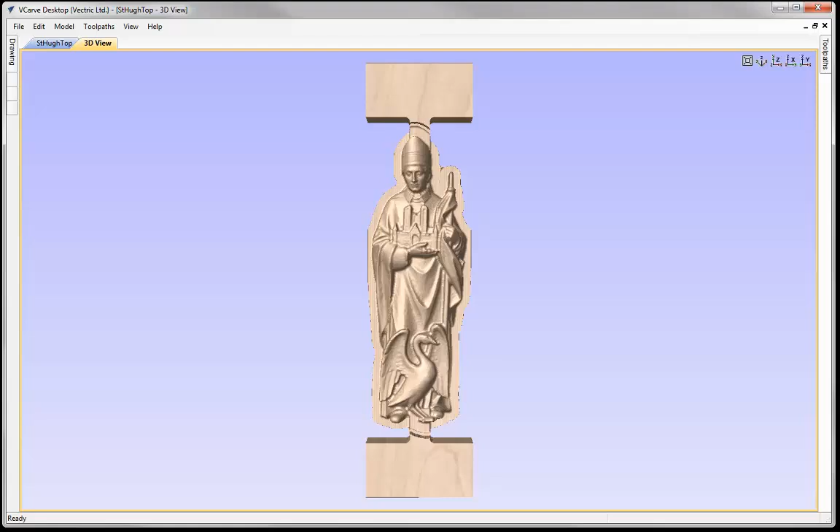So let's just go to File and Close. So let's go and create a new file. So I'm going to start with a width of 3 inches, height of 12 inches and a material thickness of 0.8. Okay, I'm going to set my XY position in the centre, and then we're going to go ahead and press OK. So the first thing that I'm going to do is create my jig.

Now I've already got my block of material. So my block of material is 3 inches wide, 12 inches long, and then it's 1.5 inches deep. Okay, so I need to create a jig that's going to house that. I'm going to create my jig out of just some 0.8 sheet of MDF. And so the first thing I need to do is draw that jig.

So we're going to go and draw a rectangle. Just going to snap to this point here, snap to the bottom area here. So we're doing that around the entire shape of my block of material. So that's the 3 inches by 12 inches. And then we could just close that down.

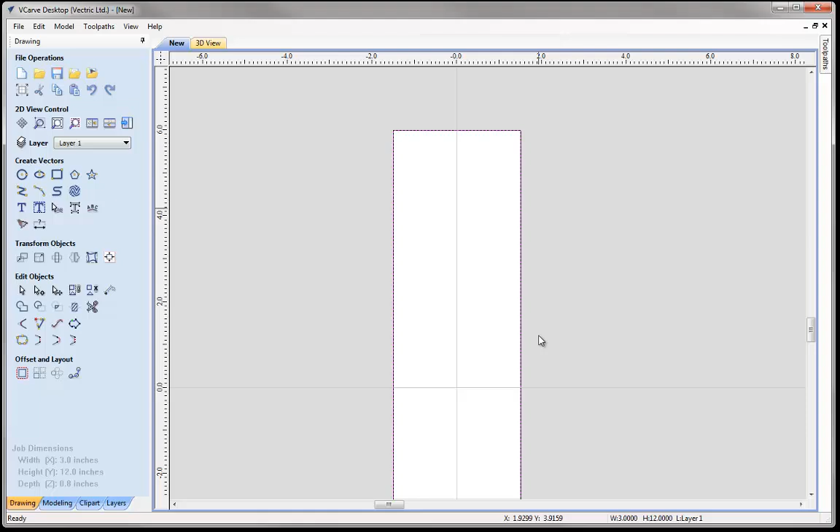Okay, now in order for me to create this pocket, I need my tool to fit around the entire area of the rectangle. So I need to create some fillets, as my 1/4 inch tool is not going to fit into this corner here, and I need to make sure that we have the whole of this rectangular shape pocketed out so we can fit my block of material in there to hold that block in place. So let's go and create some fillets.

So I'm going to use the Create Fillet tool, and I'm going to give that a tool radius of 0.13. Okay, so it's just a little bit bigger than the radius of my 1/4 inch end mill. Okay, we're just going to go dog bone fillets, and I'm just going to apply them to each corner, and we just put that in there and that in there.

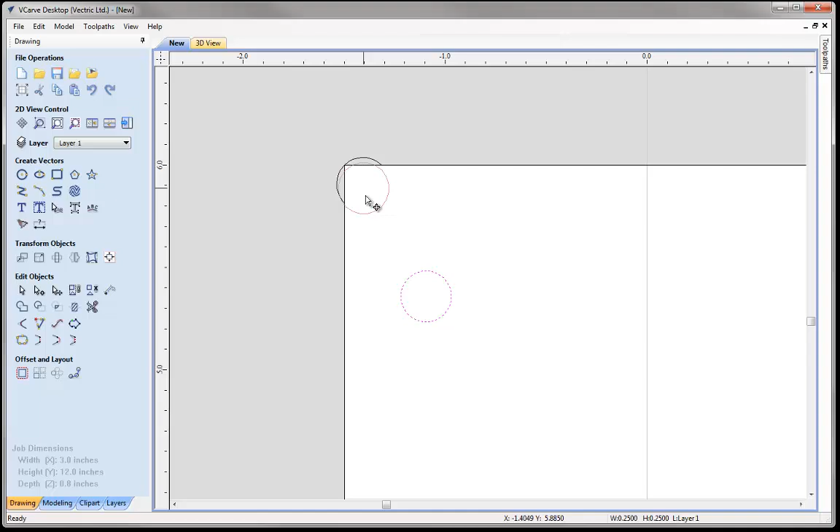And to double check that they fit, I'm going to draw a circle, diameter 1/4 inch, press Create, close that down. Then let's just take that, and then if we just zoom into this area here, we can see that my tool is going to come round and it's going to fit nicely in there so that we get the entire corner of the area that I want to pocket out.

Okay, so we know that's going to fit in there, so let's just delete that circle, and then we'll just use the option here to zoom to fit, and then we'll go over to the Toolpaths tab. So I'm going to set up our material. Now if you plan to actually machine the examples shown in this tutorial, then it's very important that you calculate all the toolpaths using parameters and settings that are safe and appropriate for your particular machine, the tooling that you have available and the material that you are using.

So let's just go and set this up. So we're going to set Z0 off the top of the block. Material thickness we're working with is 0.8. XY position, lower left hand corner. This is going to be my reference point, and this is the key to keeping the whole part aligned every time we flip the part over.

Now because we're working with a part which you'll see shortly when we introduce St. Hugh, we're working with a part that is 3 inches wide, 12 inches long and 1.5 inches thick. So you can see straight away we've got 3 different dimensions. So when we come to cutting the sides of St.

Hugh, we need to create another jig that's going to represent the shape of the side of St. Hugh, and we'll come to that later on when we go to look at St. Hugh itself. Okay, so here, this is our absolute reference point, lower left hand corner here.

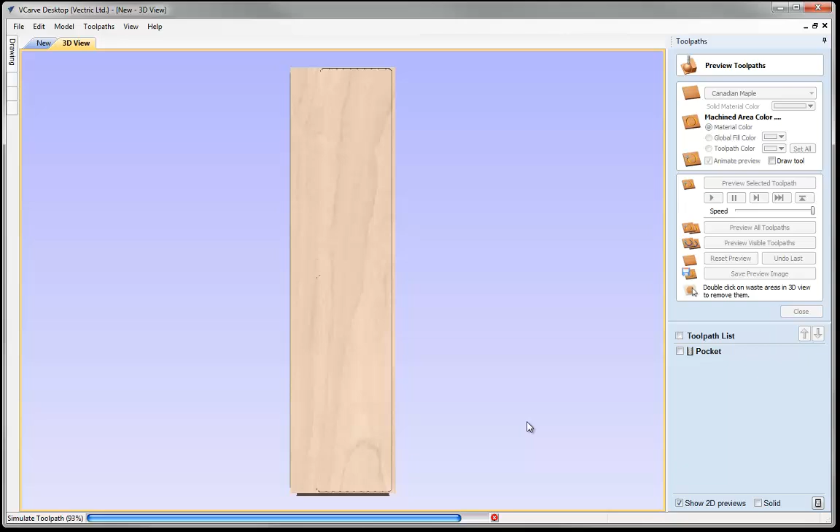Okay, so you can see it's going to do that in 5 passes. I think that was the last pass there, and as I said, you won't really be able to see anything because we're working with the entire job space.

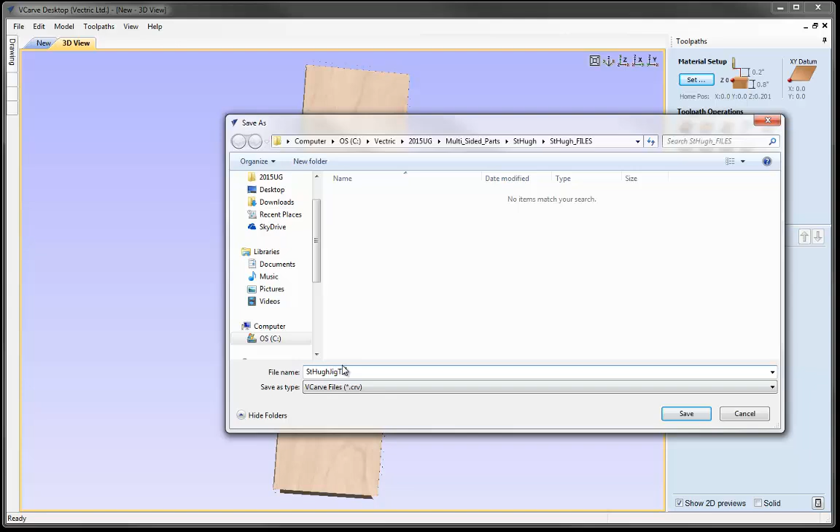Let's close that down. I'm going to save this. I'm going to say File, Save As, and then in the project folder I'm going to call this one St. Hugh Jig Top Bottom. Okay, so this is for the top and the bottom. Press Save and you can access that from the project folder.

Okay, so now I'm just going to work in the same setup. So I'm just going to delete this toolpath here. Delete that one. I'm going to switch back over to the main part, as I'll eventually save this out as the actual model itself. So let's just go and tile our windows here.

Okay, so what I'm also going to do is go back into my job setup and just put that back to the center. This is going to help for when I import the STL model, so I have my XY position in the center there. So then we can press OK.

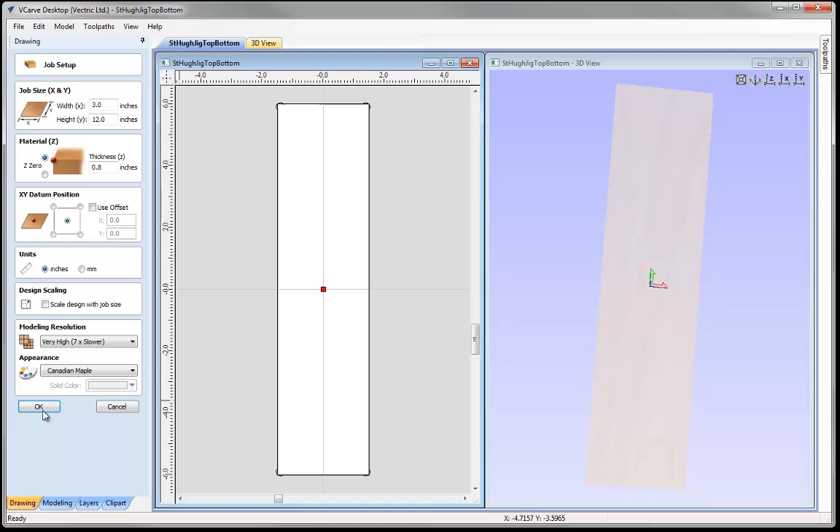And we're going to go into the modeling tab and let's bring that model in. So let's go to import a component or a 3D model, and in the St. Hugh files folder we're going to bring in sthugh.stl.

Okay, so this STL model is courtesy of lincoln3dscans.co.uk. So here we've got our model, so what we need to do is position that within our block of material. So this is the block that we have pre-sized already, so we just need to position him to fit in there nicely. So we're going to start the initial orientation.

I can see it, we can see the back of St. Hugh there, so I'm just going to switch to the bottom. Okay, now he's upside down, so let's just rotate that about the z-axis -180. Okay, now I've got him in the right initial orientation there.

So now we need to think about the size of St. Hugh. Now, as I said, we're working with 12 inches by 3 inches. We're not going to bring St. Hugh up to 12 inches because we've got to remember we want to have some area at the bottom and at the top to have as a contact point within our jig to hold the model in place. And this will make sense as we start to work through some of the toolpath side of things.

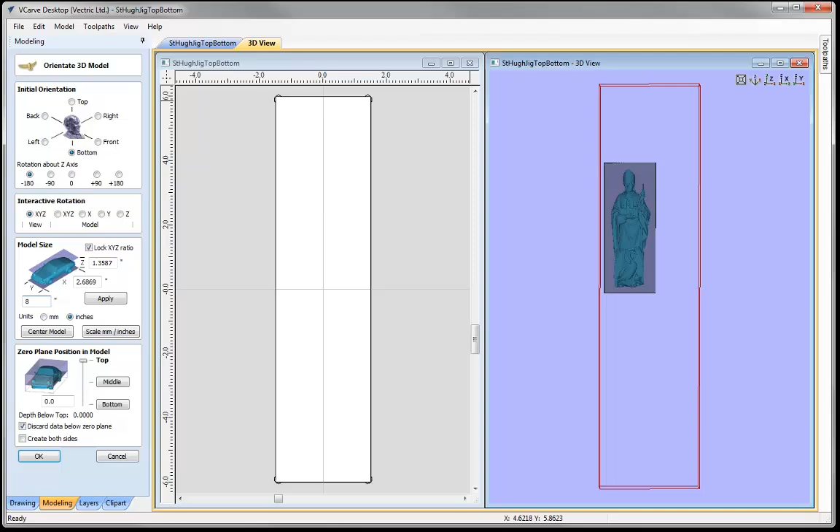So let's just go and give St. Hugh a height of 8 inches. Okay, so you can see if we just apply that to see how that looks. Okay, so that's not too bad. And we can take a look at our x value and our z value.

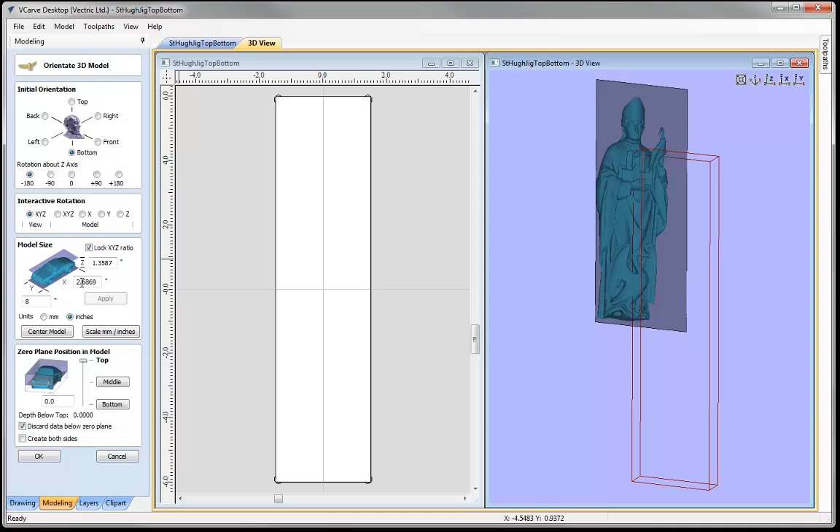Now, our x value is at 2.6869. Now, I could, just to help myself out when it comes to the toolpath side of things, when I set up my material, I might just round this up to 2.7. I'm not going to really distort this a lot because it's such a small amount that I'm rounding up to. So to do that, I'm just going to uncheck lock XYZ ratio. That way I can just alter each one of these values individually without it affecting any of the other values. So let's just change that to 2.7, and then if I just press apply, you can see there wasn't much of a change there, so that's okay.

I'm also going to change the z value and make that 1.4. So I'm rounding that up, so let's just check, see how much difference that makes. I'll make that to 1.4 and then press apply.

Okay, there's not much difference because we're only doing it by very small values. If we just use the option here to center the model, bring that into the center, we can see how he looks. So we've got him at a height of 8 inches, and a width of 2.7.

The reason for that is we are working with a material block that is 12 inches long and 3 inches wide. So that extra 0.3 space surrounding the left and right side of St. Hugh is just so I can go in and remove the material using a pocket toolpath, and you'll see that shortly.

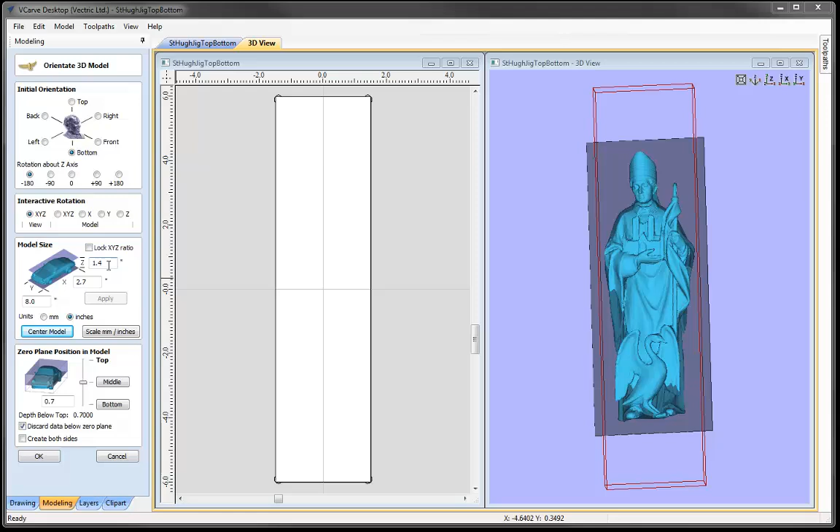So we've got a Z depth of 1.4. Our material thickness is 1.5, and I've put that at 1.4 just so that we have a gap above and a gap below our model so that we avoid any flat spots. That's a gap above of 0.05 and a gap below of another 0.05, and that's the reason for putting the Z value at 1.4.

So we've got that in the centre. We know that's in the centre because we use this centre model option here. And now we move on to the 0 plane position in the model.

Now you can see all the shadow area here is sat below the 0 plane. We want to cut all of St. Hugh out, so we want to push that 0 plane all the way to the bottom so we can get as much of the model as we can in view, so you can see how that will look.

So that's the top of St. Hugh. Let's go ahead and press OK. So let's take a look at him in the 3D view.

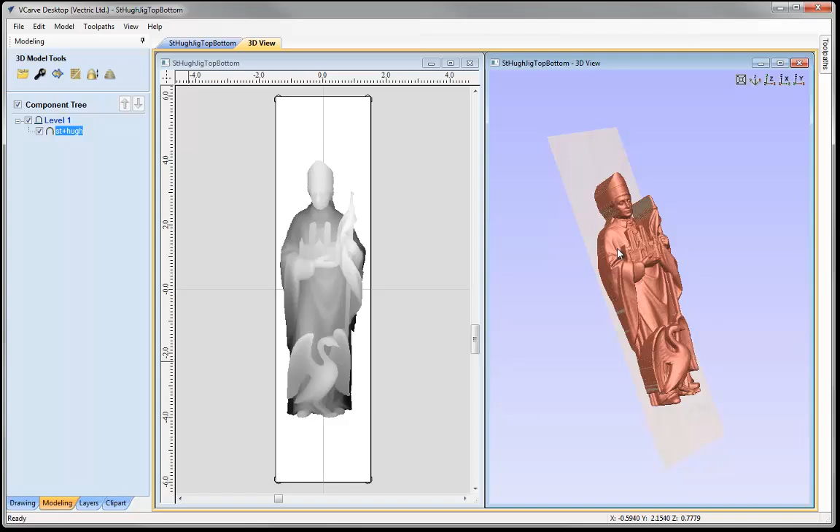So you can see we've got a lot of vertical walls within that model there, and that's just the way the software works. We just work with relief work, that's why we're not getting the underside of St. Hugh. So we've got all of that vertical wall to work with.

So now we need to think about how we're going to hold the model within our block of material. We can't just cut this out, otherwise it'll just fall out. So we need to think of how we're going to hold that in place.

Now if we go into the clip art tab, you can see we've got a folder here called 3D tabs. So you can access that in the project folder. Let's take a look at what we've got - lots of different types of tabs in there. And I'm going to go with the rectangular 0.75.

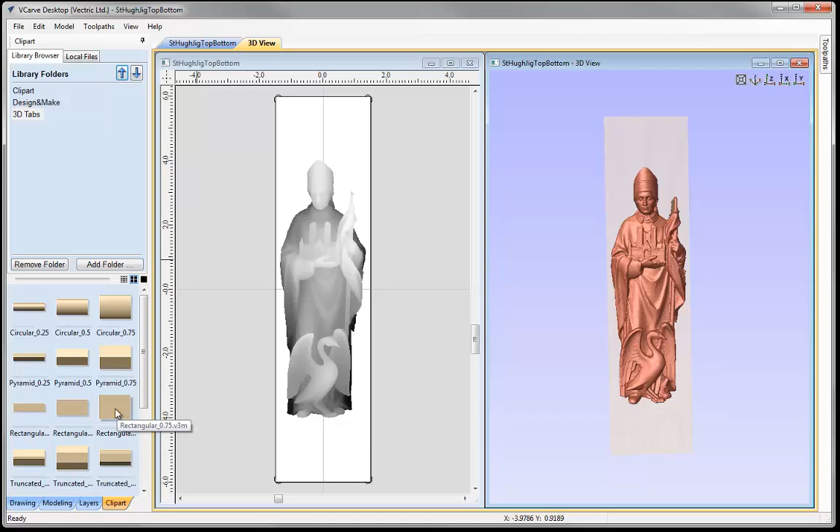I'm just going to double click that to put that in place. So you can see that's in the center there. I'm going to go into the drawing tab and rotate that about its center point, rotate it 90 degrees, and press apply.

Then close that down. And then I'm simply just going to hold down shift with that selected and just drag that up to the top area over here. Okay, just zoom in a little.

You can see it's sort of overhanging St. Hugh, so I'm just going to hold down shift and bring that in a little bit. Something like this shape here, and we'll just pull that up a little bit more. So let's have a look in the 3D view.

Okay, you can see it's a very thin tab. I need to really maximise that. So with that selected, let's go into the modelling tab. I'm going to look at the properties of that. So you can see it's at 0.1106.

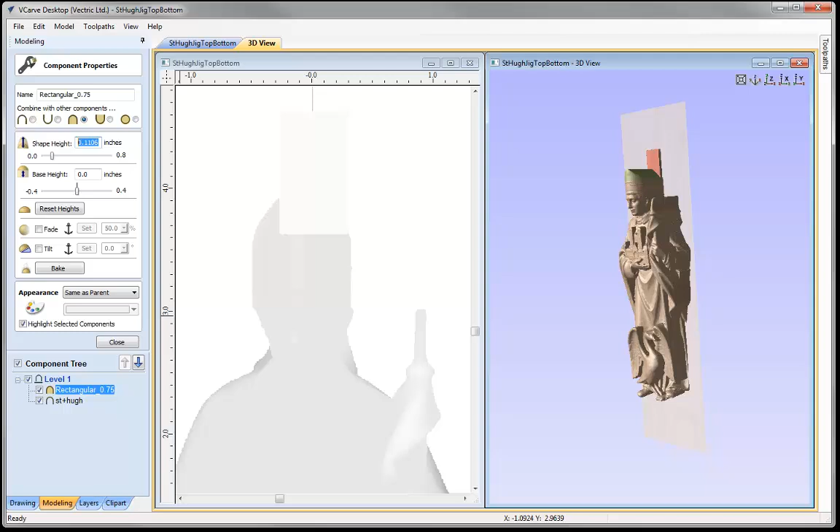I'm going to knock that up to 1 inch, press space to enter that in. We can see that's lifted that up, and so we know we're going to have a tab that's going to be 1 inch thick on the frontal top side of St. Hugh. With that selected, I'm just going to simply create a copy to go at the bottom.

So let's close that down. Select that again, go into the drawing tab. Let's use the mirror option, flip about job center, create a mirrored copy. I'm going to flip vertical and close that down.

Now we can see that this tab at the bottom is a little bit too high for our model, so we need to look at decreasing that one. Let's go in there and just bring that down to say 0.8, and maybe bring that down to 0.7.

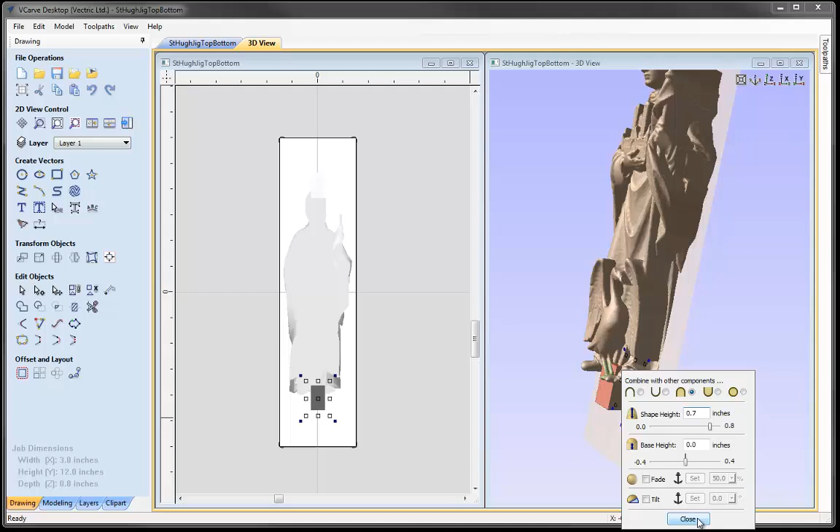Okay, so I'm happy with that. We can close that down. I could even look at hand finishing in this area, but I need to make sure that I have quite a bit of depth in this tab to ensure that my model sits in place. So that's our tabs. Let's put that back in 2D.

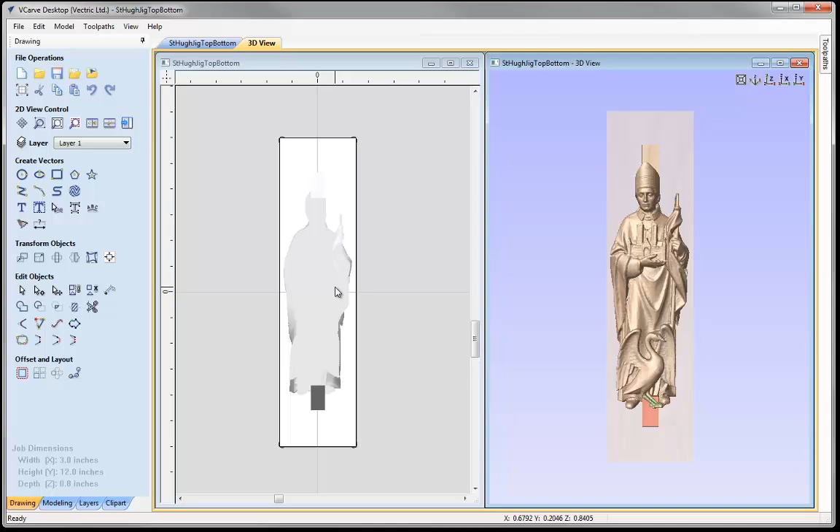Now I need to think about creating some vectors and vector boundaries for us to machine into. The first one we're going to create is the outline of St. Hugh. With that selected, let's go into the modelling tab and use this option to create a vector boundary, and we can see it's created that.

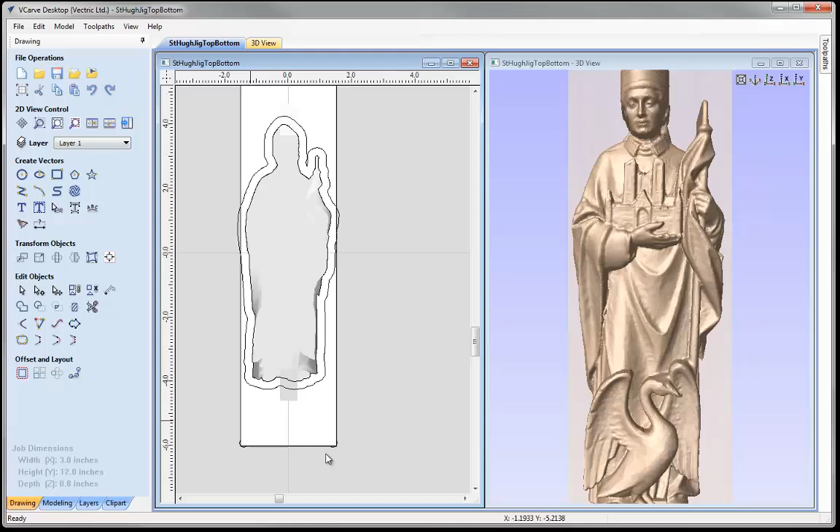I'm then going to take that vector boundary and offset it outwards by a quarter of an inch, press offset, and close that down. The reason for that offset is so that I'd still have some tab in place. I can't just cut directly around St. Hugh, otherwise he'll just fall out of the block of material. So we keep that tab intact with our block of material, contact point at the top, St. Hugh, then the tab, and then the bottom contact point with the block of material.

Let's just put that back in 2D, and then we'll zoom to fit. Now we need to create a shape that represents the area we'll be cutting and the area we won't be cutting. So let's draw a rectangle.

So this is the area that we'll be cutting away, and this part at the top and this part at the bottom is going to be our contact point between the block of material and the model, and this is what will be sat within our pocket shape, so it's going to keep that in place.

So let's think about some more toolpaths that we need to create. We're going to have a block of material, so the first toolpath we really want to create is one that's going to cut away some of the excess material that we don't need, a lot of the side of St. Hugh. So I'm just going to take this tab here, go to the modelling tab, and create a boundary.

I'll do the same for this tab here, create a boundary there. I'm then going to shift-select that vector, shift-select that vector, and move those to a layer, just call that new layer. It's just going to be a temporary layer for now, pocket. Just call it pocket, and then we'll make that not visible, press OK.

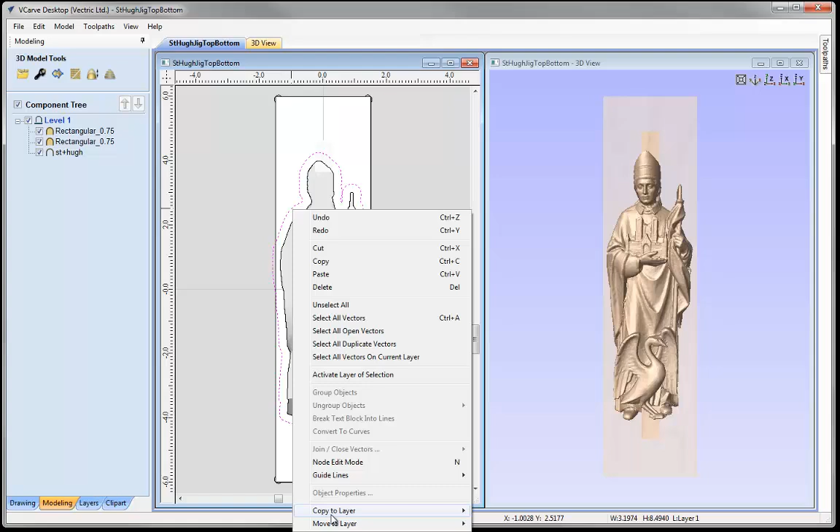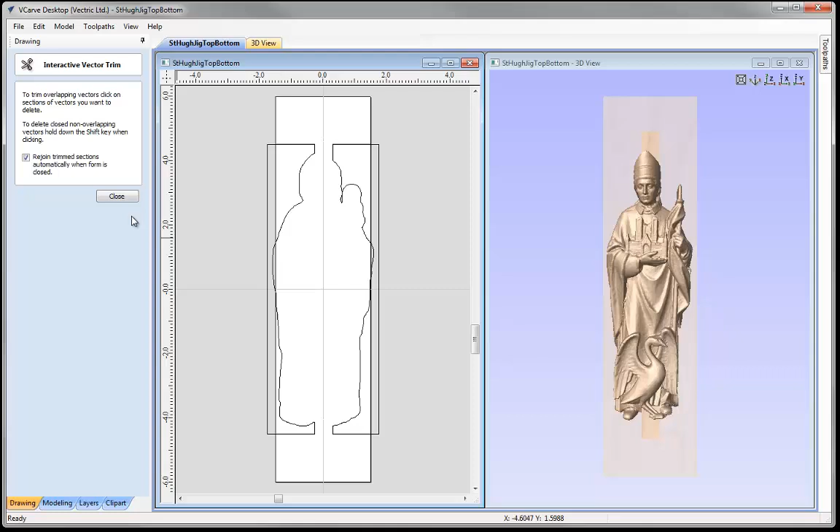I'm going to take this outer vector, right mouse click, and say copy to layer, pocket, and go to our layers tab, switch off layer 1, switch on the pocket, make sure that's the active one, and then I'm simply going to trim away the areas I don't need. So that's everything inside, I take that away, this and this, and I'm left with the outer areas between that rectangle shape and the overall outline of St. Hugh, along with the tabs, because we don't want to cut into the tabbed areas.

So let's take those vectors, right mouse click, say move to layer, layer 1, go to our layers tab, we can delete that layer now, so let's delete it, switch on layer 1, and then we can see we've got all the vectors we need now to go ahead and create some toolpaths. Let's switch over to the toolpaths tab, using that option there.

Now the first thing we need to do is set up our material. We've still got this set up as if we're working with that pocket shape, so we need to change that. Let's go to material setup. Material thickness we're working with is 1.5 inches. We're going to set our XY position in the lower left hand corner.

We must make sure that we do that because that's where we're referencing from this pocket shape. Okay, so this block of material we're going to carve St. Hugh out of is going to sit in this pocket shape here, and we set the XY to be in the lower left hand corner there, so we must make sure that we have that the same in both files.

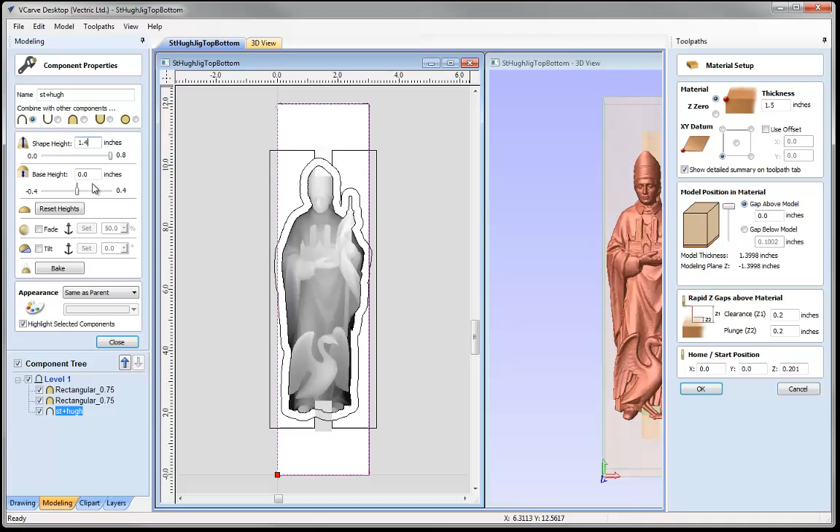Okay, so with that selected there, we then now move on and we can think about the model position in the material. Okay, so we've got a gap above, well, we can see the model thickness is 1.3998. So what I should do really is just quickly go back over to the modelling tab, go into the properties, select St. Hugh, and let's just round that up to 1.4, and then press space to enter that in. We can close that down, and then we could go back over to the toolpaths tab.

So the first toolpath we're going to create is the pocket. We're going to clear the material outside the surrounding area of St. Hugh. And that's just going to make it easier for us when we turn the part over and cut on the back side, and ultimately when we cut the side there won't be any material there. So let's take those vectors. I'm going to select that one, shift and select this vector here. Let's go to the pocket toolpath. Okay, start depth is going to be 0, it's going to be at the top of our block of material, and we're cutting down all the way, so we're going to do that at 1.5 inches.

So at this point it's a good time to make some decisions about the tools you're going to use. In this case I'm going to use a 1/4 inch end mill, so please make sure that your tool would fit down the 1.5 inches in that block of material. So I'm happy to do that, so I'll just go and use that end mill there. And then we could go down. I'm going to do that in a raster motion. I'm going to profile last, and I'm going to do that at a raster angle of 90 degrees. It's going to go up the y-axis. Call that pocket, and then we could go ahead and calculate that.

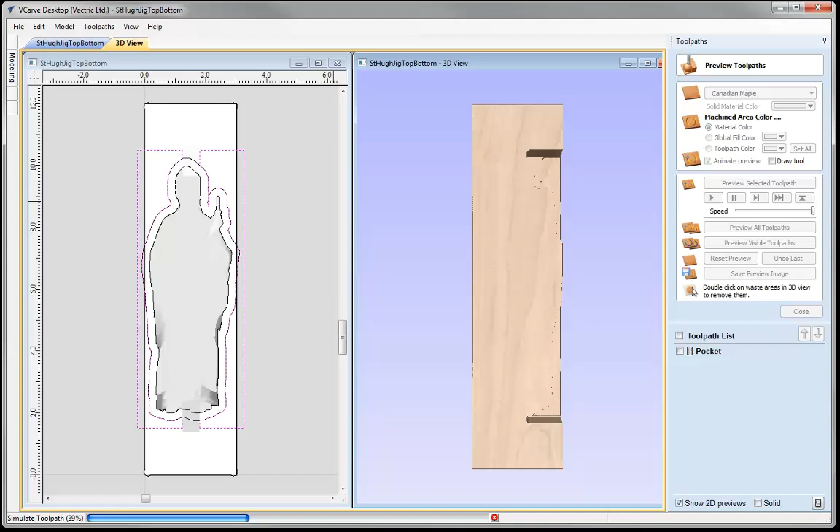Let's just preview that toolpath. You can see it's removing all of the excess material on the right hand side, and then it's going to move on and remove everything on the left hand side. And so you can see straight away that we are left with the top block and the bottom area of our block intact, and this is the area that's going to keep our model in position, and it's going to keep it in line because we've got that sat in our pocket shape that we created.

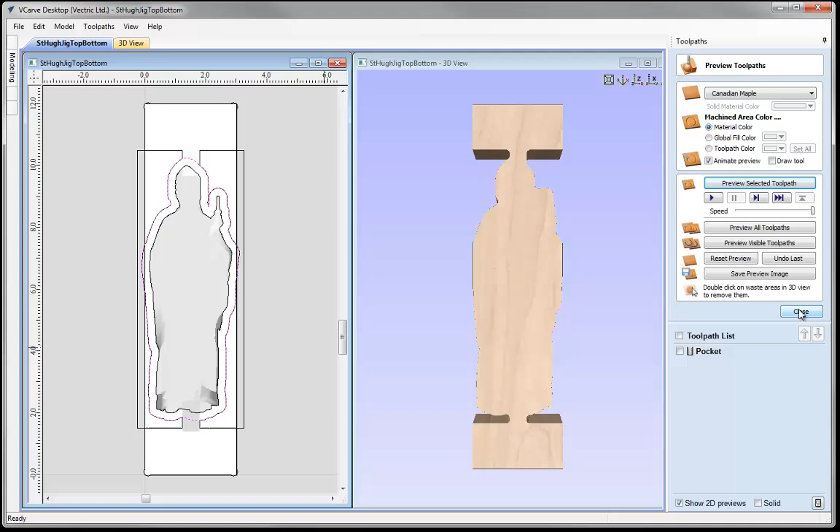So now we can start to think about the 3D toolpath. So let's select the outer vector for St. Hugh there. We'll just close the preview toolpaths option down. And the first toolpath we're going to run is the 3D roughing toolpath. So in here, again, we're going to use a 1/4 inch end mill. I'm going to use the selected vector, so we're not going to have an offset because we've already offset the boundary vector of St. Hugh.

Machine allowance of 0.03, and then what we're going to do is we're going to apply a Z-level raster cut on that. We're going to raster in the Y direction, so it's going to follow the grain of wood. So it's going to go in a Y motion up and down. We're going to call that one 3D roughing, and we'll press calculate there. That's just going to work that out for us.

Okay, so you can see how that will look. So let's just preview that toolpath. You can see it's just chopping away there at the excess material, just so it makes it safer for us to go in with a smaller tool to finish off St. Hugh. Okay, so that's not too bad.

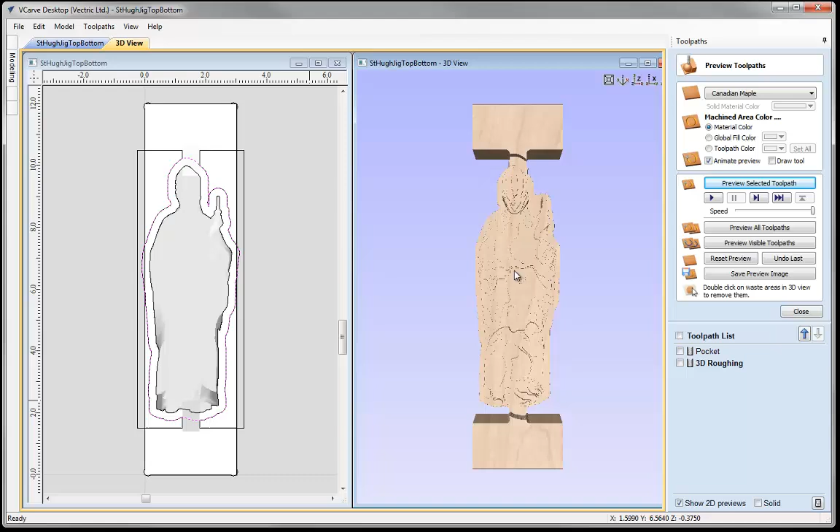That's okay. What I think I could do with though is going over St. Hugh with another roughing toolpath. So let's go back in there with the roughing toolpath, and this time we're going to do the 3D raster option. So I'm going to raster that along Y again, just to try and get rid of some more material there. But this is going to follow the shape of our 3D model. So let's just go ahead and call that 3D roughing 2. Press calculate, and this is going to take a while to calculate those toolpaths.

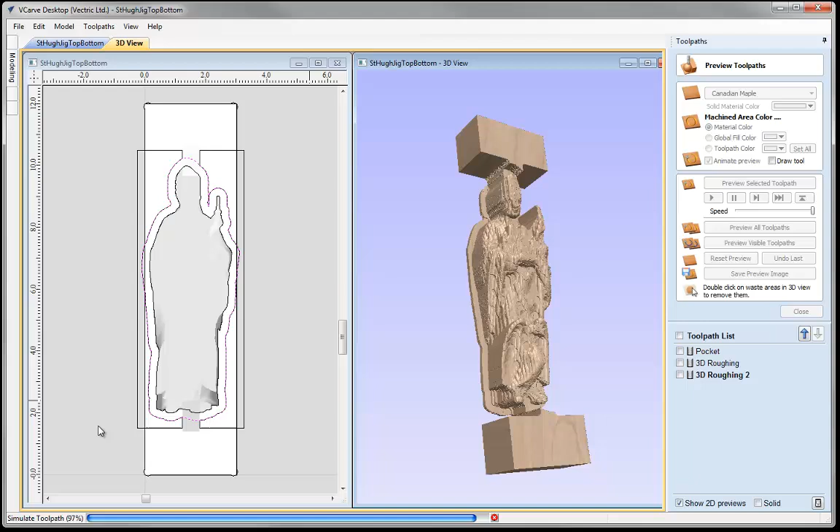Okay, so you can see that there, so let's just go ahead and preview that toolpath. We can see it's going in sort of the Y axis there, and you can see it's taking away a lot of material. We're getting something that resembles the model a little bit more than what we had earlier. Okay, so it's taking a while to do that. This toolpath has a little bit more work to do. Okay, and so you can see how that looks. So you can see now when we go in with a smaller tool, it's going to be a lot easier for us to cut away to get the detail.

So let's close that down, and then with that vector selected, let's go and run a finish toolpath. Okay, in this case we're going to use an 1/8 inch ball nose. Now again, please be wary of the tools that you use and ensure that you have the correct length, as we're going to cut pretty much all the way through. So ultimately the bottom area is going to be at 1.45 inches. Okay, so we're just leaving that 0.05 at the bottom there as the gap below. So you want to make sure that your tool is safe to use in this case.

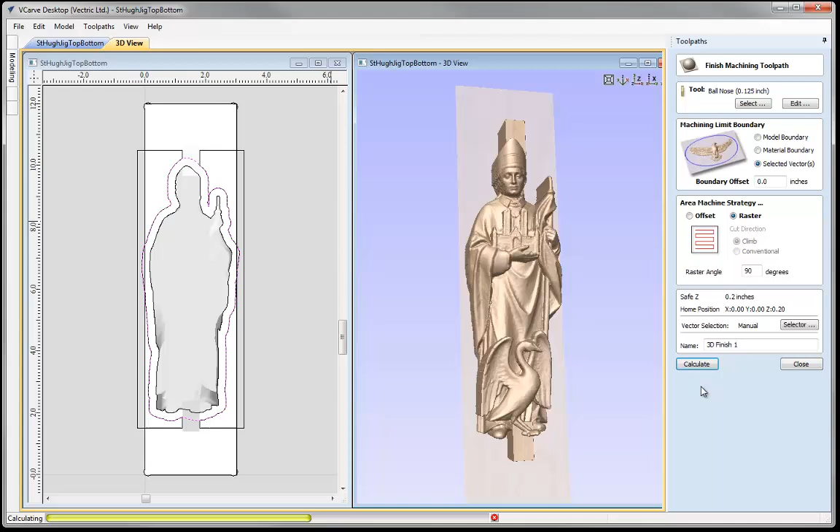So again, I'm going to use the 1/8 inch ball nose. I'm going to use that selected vector with no offset. I'm going to raster that, and again, let's just do that at 90 degrees so it travels in the Y direction. And then we could call that 3D finish. We'll press calculate. It's going to take a moment to work that out. There's a lot more detail here for the software to calculate.

Okay, so you can see how that would look. Let's just preview that. Okay, so you can see we've got this sort of halo area, and that's the 0.05 gap below that we've left on there. So that's what that is. Okay, so you can see the detail looks okay, so I'm happy with that. So we could go ahead and close that down. Okay, so at this point, we just go back into the preview there. This is what we'll be left with.

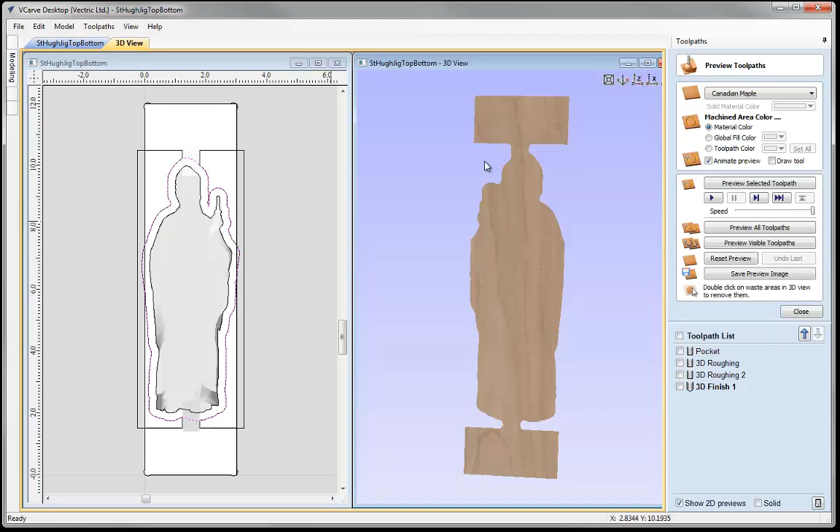And so this is where we need to turn our block of material over. So we can turn that over 180 degrees, and then we need to calculate the back side of St. Hugh. So let's just go and save this file. So go to File, Save As, and we're going to save this one as St. Hugh Top. Okay, so just change that name there. So St. Hugh Top, save that. And then we could go and start to create the bottom side of St. Hugh. So let's just close that down, and then we'll just close this session down.

I'm going to go and create a new file. So again, exactly the same dimensions, 3 by 12, Z0 on the top. Okay, we're going to make that 1.5. Just to set this up, we're going to set our XY position in the center, working with very high modeling resolution, and then we could go ahead and press OK. So let's go and import St. Hugh. So let's go to the Modeling tab. We're going to import a component or a 3D model, St.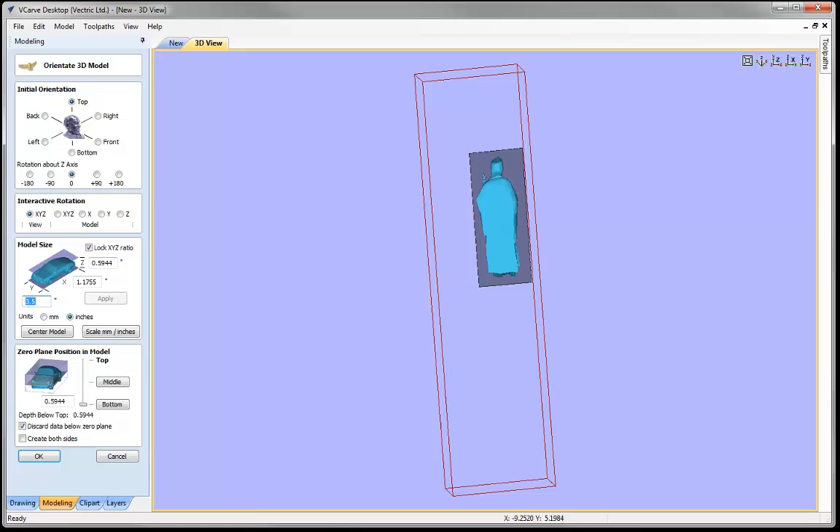Hugh STL, press open. Okay, so we've got the back in view, so now I just need to alter the size. So again, I'm going to make Y 8, press apply, then we're going to uncheck lock XYZ, we're going to round this one up to 2.7, I'm going to round that one up to 1.4, press apply. I'm going to make that in the centre, and then we're going to push that 0 plane all the way down to the bottom, then we can go ahead and press OK. So let's just go to view there, I'm just going to go and tile our windows vertically. First thing we need to do is create a vector boundary, so we're going to do that by pressing that option there.

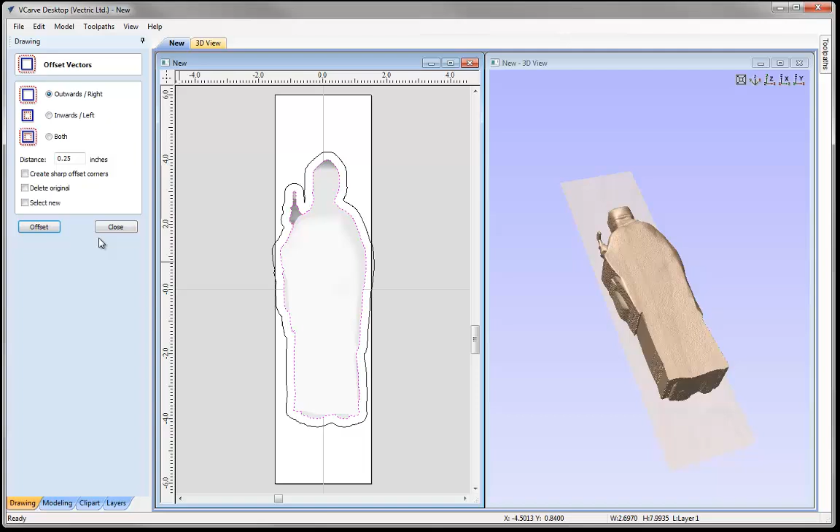We're going to the drawing tab, we want to create that offset, so with that vector selected, let's go to offset, outwards, 1/4 of an inch, exactly the same as we set it up before, press offset and then we can close that down. Okay, so now I need to put my tabs in.

Now I want to make sure my tabs are in the same position as we had on the front side. So what I could simply do is just bring up the file we worked with earlier, so here's the top. I'm going to take this tab, shift and select this tab, and while I'm here I'm also going to select these vectors here. This is purely just to double check the alignment to ensure that when we turn St. Hugh over on the top side, so we've got the bottom side ready to cut, that everything lines up with the top and the bottom.

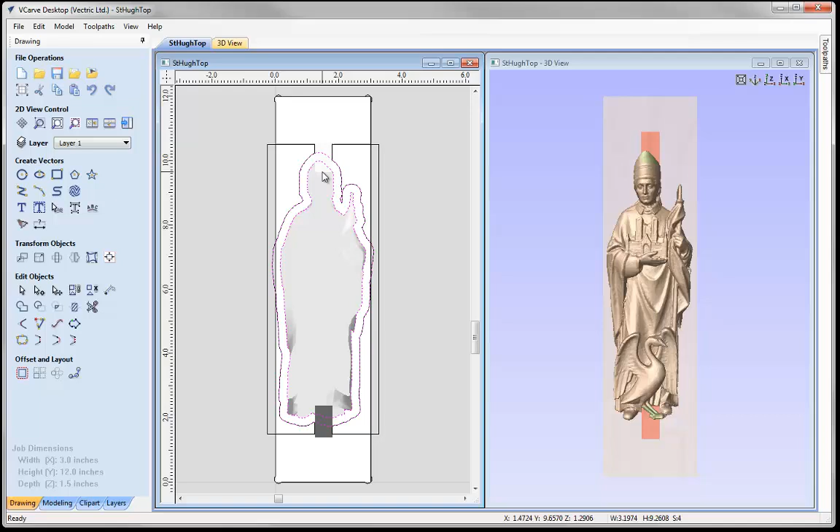So I'm just going to take those, right mouse click, press copy, and then if we just go back into the back side, I'm just going to right mouse click, press paste. Okay, so you can see it's brought that in a different position, and that's because in the other file we ultimately set the XY to be in the lower left hand corner, and this is set up to be in the centre at the moment.

That's okay. So I'm just going to take everything that we've just pasted in there, and press F9 on the keyboard. That's going to bring that into the centre, and then I'm going to use the mirror selected objects option. We do not want to create a mirrored copy, so I'm going to uncheck that, but I'm going to make sure we have flip about job centre, and that's important because we have everything set up in the centre when we import that STL model.

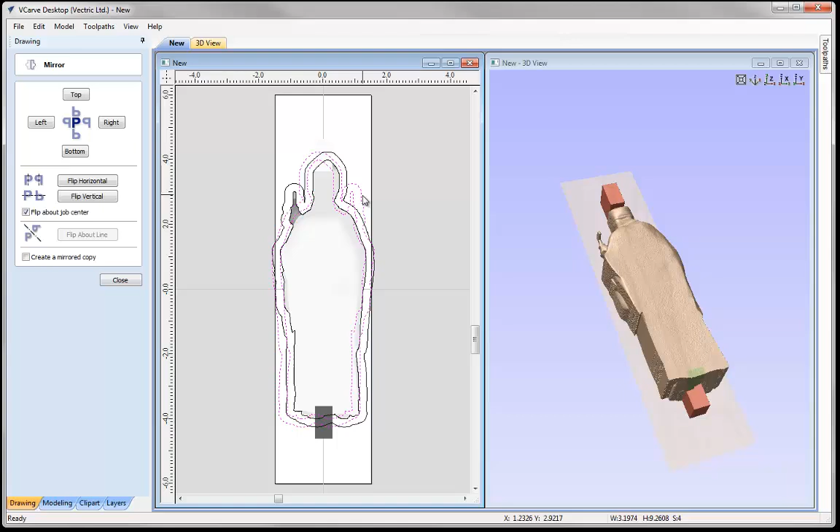So we're going to do that about the centre, and I'm just going to use the option to flip horizontal. Let's do that, and we can see that that is perfectly lined up, so I'm happy with what we've got there. So let's just close that down, deselect the tabs like so, and then delete those vectors that we just pasted in there. Okay, so we've got our outer vector, the boundary vector, and our tabs in the exact position that they'd be in when we turn the part over.

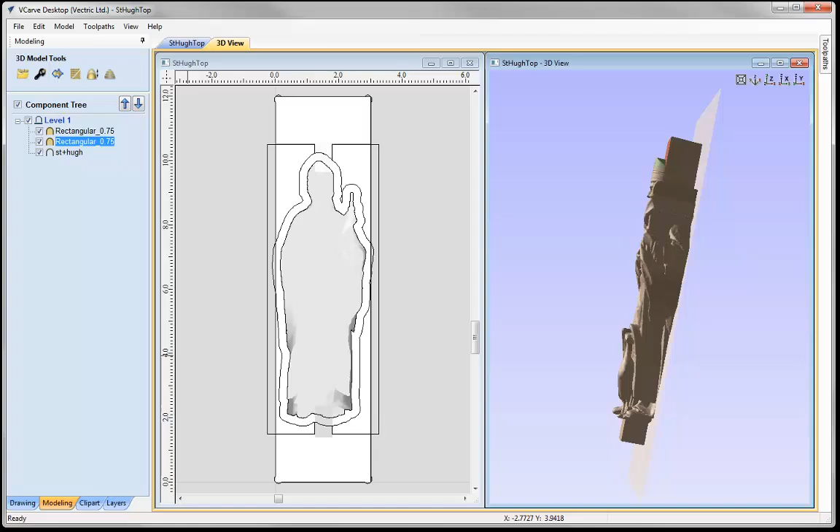So the next thing we need to do is think about the heights of our tabs. We want to make sure that we don't cut away our tabs altogether. So let's just think about the bottom side here. This is the easiest side to think about. Now, when we created the top side, if we just open that file, here's the top, we know that the tab is going to be at the bottom here. So we want to make sure that our tab is going to come up almost to the top of our model. We want to bring that right up to the area just before the cloak, not higher than that, just below the cloak area here.

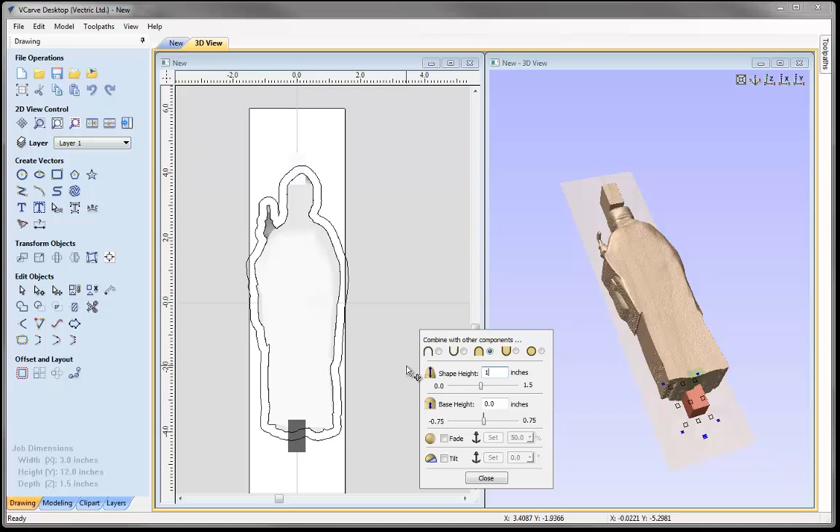So what we could do is just alter that in here. Let's select that little rectangle, and make that say 1.4, then press space to enter that in. Okay, so it's a little bit too big, so let's just make that 1.3. You can see that's just sat nicely underneath there. So we know that we're going to have tab still intact there. So I'm just going to leave that as it is. Let's think about this one.

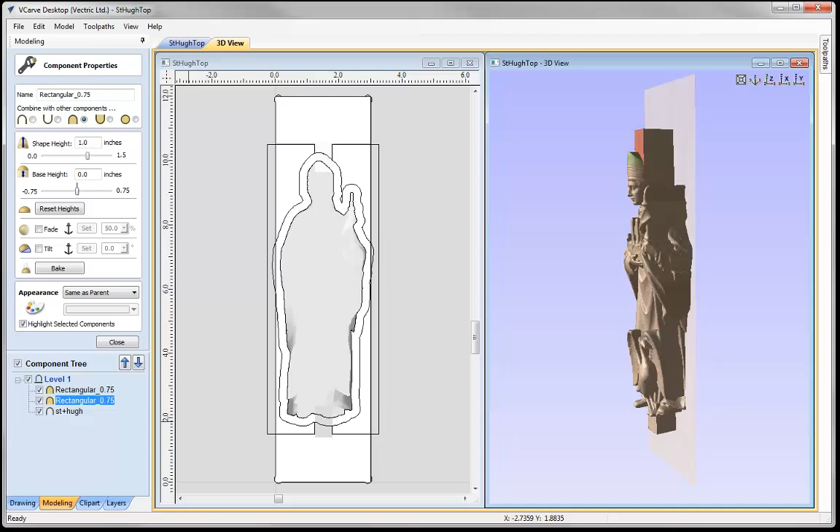Now if we go into the original file, the front side, the top tab that we've got here, if we just go to the properties, we know it's 1 inch. So we can see that it starts around here, and the end just goes to the bottom of the plane here. So we don't want to cut too much away, so let's just open up the back side. You can see that it's currently at 1 inch, and that's what it was for the top side. So I'm going to set the shape height of this to be say 0.85, just to ensure that I have quite a bit of material left in there for when we cut that out.

Okay, so you can see that there. So you can see it's going to come into the top of my model, but that's okay. I can look at hand finishing that myself. So let's just close that down, put that back in Z, and now we're ready to go and run some toolpaths. So let's switch over to the Toolpaths tab.

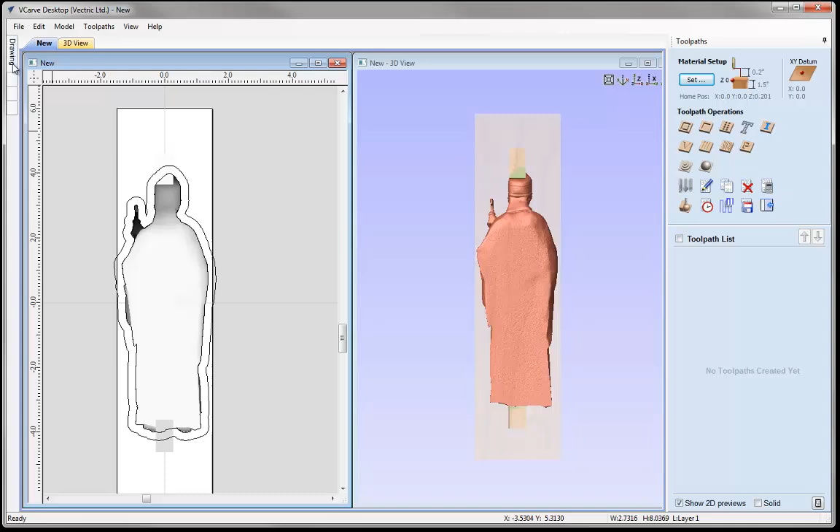Well, first, before we do that, let's just take our model and just double check the height of that. Okay, let's just round that up to 1.4, press space to enter that in, and then we can close that down. Okay, I'm just going to unpin the drawing tab there. So we're going to take this outer vector here. Remember, we've already cut away the material from the top side with that pocket, so we don't need to worry about creating another pocket on this toolpath.

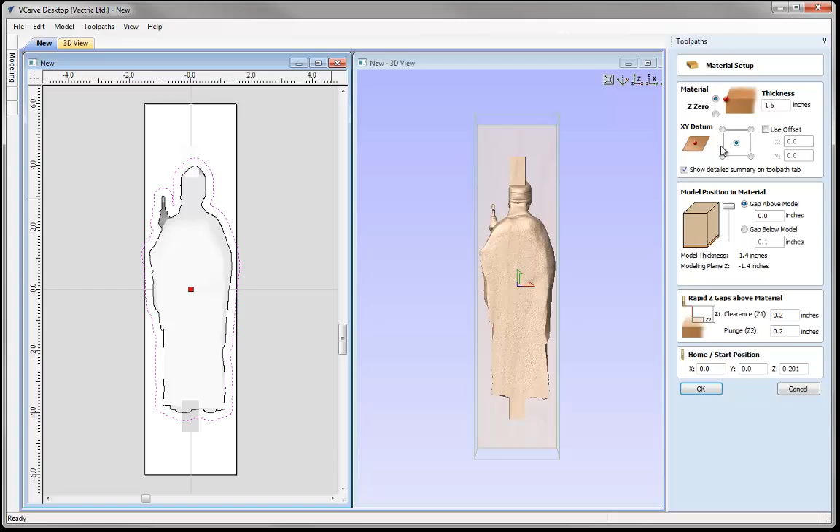So the first thing we need to do is set up our material. Okay, we're setting our Z0 top of the block, material thickness we're working with is 1.5. XY position, we want that in the lower left hand corner. We are referencing from the same point from the top side of St. Hugh and from our jig that this block of material is sat within. Okay, so make sure that's in the lower left. We're going to have a gap above 0.05, so remember we left that 0.05 on the top and on the bottom there, and then we could just go ahead and press OK.

So with that vector selected, let's go ahead and run our first toolpath. So again, we're going to do 3D roughing toolpath, the same toolpath that we did for the top. So we're going to do a Z-level raster strategy. Okay, we're going to use a selected vector, no offset. We're going to raster in the Y direction. I'm going to call that 3D roughing, and let's press calculate. Software is just going to work that out for us. Let's just preview that. We can see how that looks.

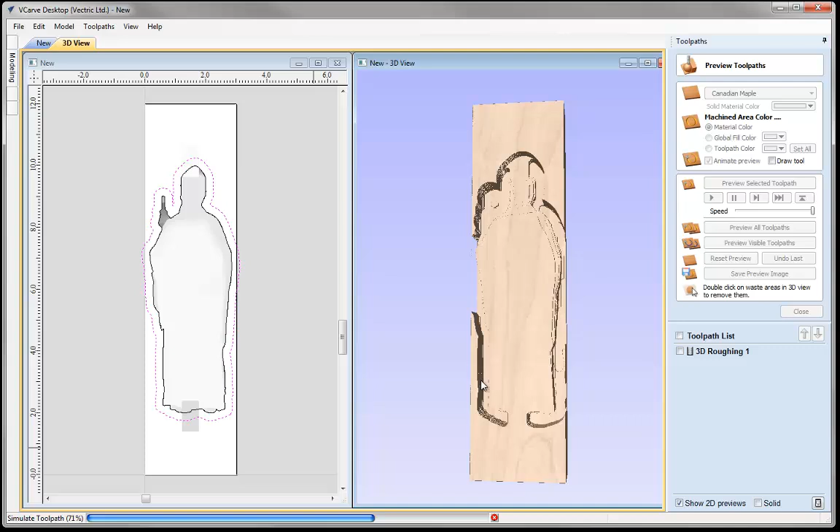Now, as I said, remember this material here will not actually be there because we've already cut that away. And this is just one of the limitations to the software in that we can't preview more than one side at a time. So we have to always remember that and think about how the part looks on the front side, and now that we're creating the back, how they will match up. Okay, so I'm happy with that.

Let's close that down. We're going to do another 3D roughing toolpath. This time we're going to do a 3D raster along Y, press calculate. And again, software is just going to take a moment to work that out for us. And then let's just preview that toolpath. Okay, it's just taking a while to work out. It's a lot of information to put through there. And there we have that part. Okay, so let's just close that down.

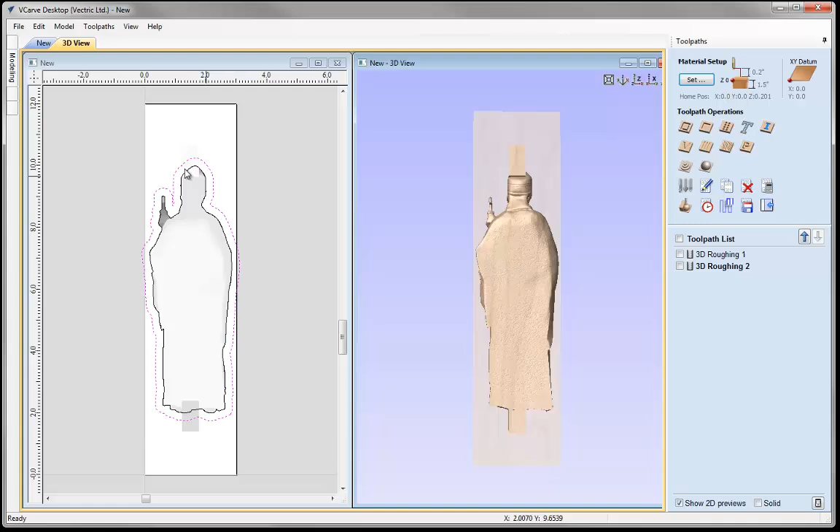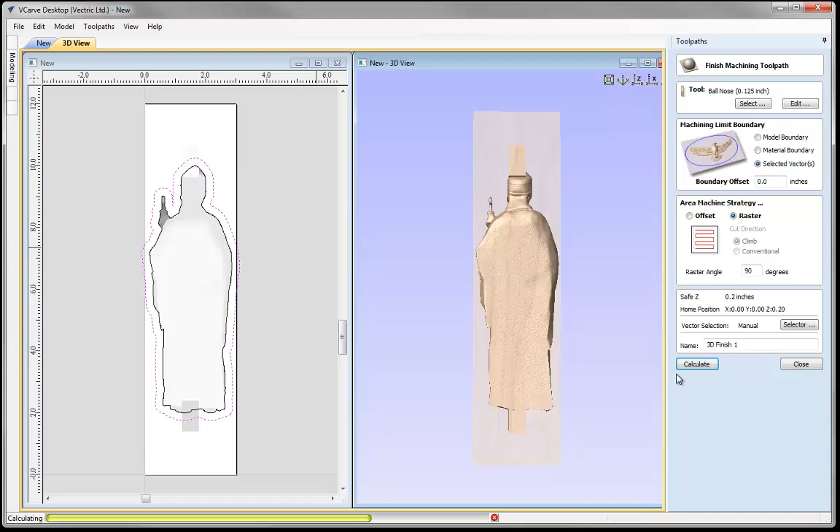With that vector still selected, let's run a 3D finishing toolpath. I'm going to use an 1/8 inch ball nose in this case. Use a selected vector. I'm going to do that in raster strategy. I'm going to do that 90 degrees, so it's going in the Y axis. Let's press calculate. The software is just going to work that out for us. And then we could go ahead and preview that toolpath, see how that looks. Okay, so I'm happy with that. That's brilliant. So let's just close that down.

So at this stage we'll go ahead and save this file. So let's go to File, Save As. We're going to call this one St. Hugh, and this time we're going to call this one Bottom. And then we'll press Save. And now we've got our top and we've got our bottom. So now I need to think about the sides of St. Hugh. So we're looking at the side, the right and the left. So let's just go and close this down. So go to File, Close, and we're going to go and create a new file.

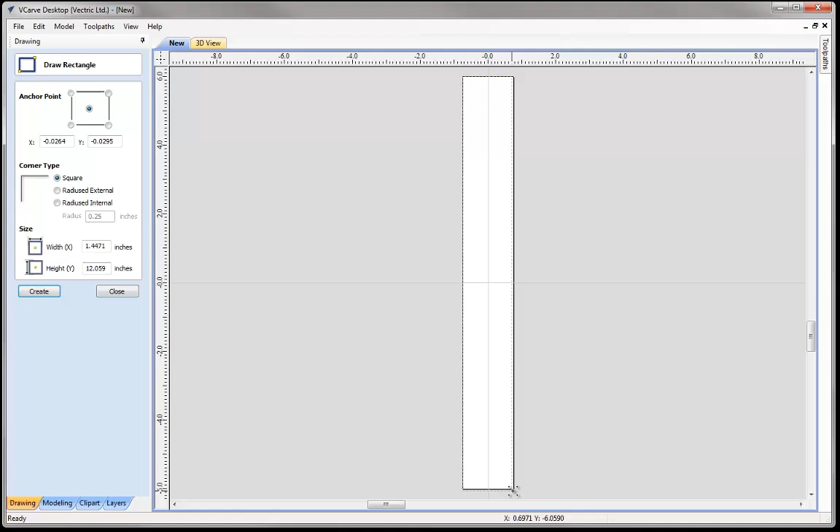Now when we're turning that block of material on its side, we need to swap the width and the thickness dimensions. So now the width is going to be 1.5 and the material thickness we're working with is going to be 3 inches. So we could go ahead and press OK. And so again, our first point of call is creating that jig. We need to make sure that we've got a jig in place that's going to hold the side of our material block. So again, let's go and draw a rectangle. I'm going to snap to the top corner, snap to the bottom corner. You see that's 12 by 1.5.

That's what we just set our job position to be. So with that vector selected, let's just go and create some fillets. So again, we're going to use 0.13 radius there. So let's just go and attach those to each of the corners. Then we'll just put that in there, close that down.

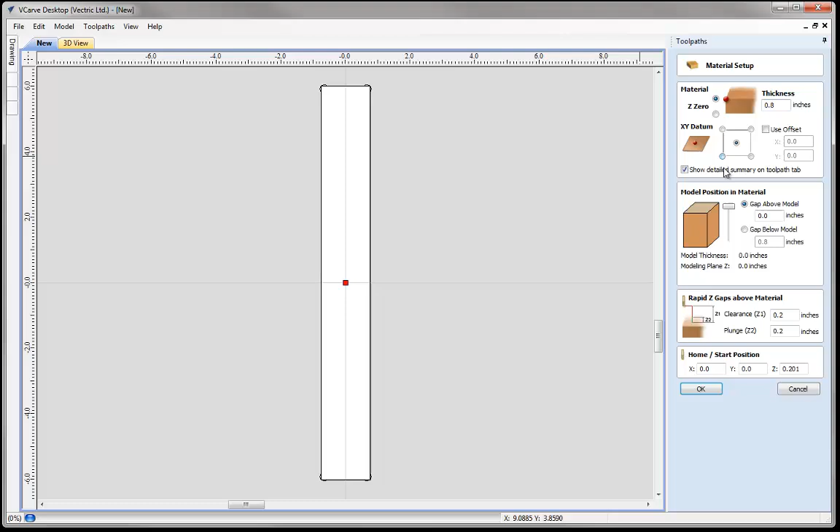So what I really need to do is go to the Toolpaths tab. Okay, we need to set up our material. Okay, now I've actually set this up as if we were working with a material block. What I should have done is set this to our piece of MDF. So we're going to put that material thickness down to 0.8. I'm going to go in the lower left hand corner, so this is our point where we're going to reference from, and then we could go ahead and press OK.

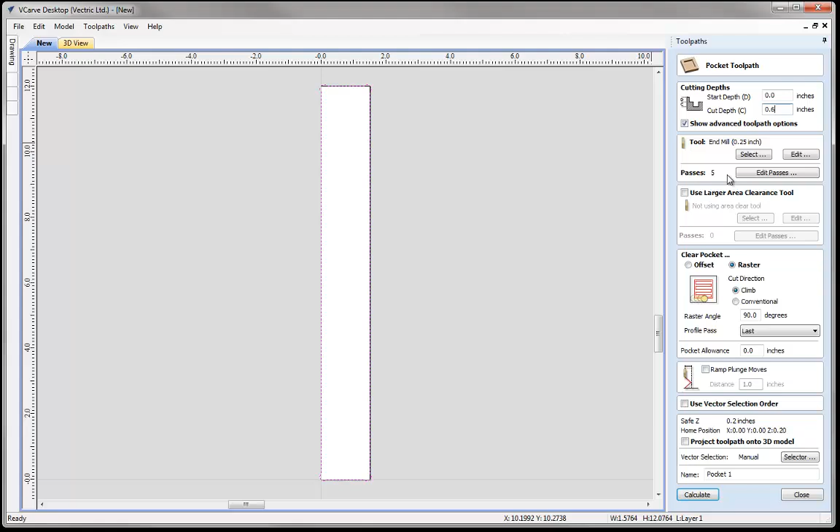And then we're just going to go and run a pocket toolpath. So let's select that vector, run a pocket. I'm going to cut down 0.6 in this case, use a 1/4 inch end mill. You can see it's going to do that in 5 passes. Just going to raster that. We'll press calculate, and then we could preview that, but we're not going to see anything, so I'm not going to preview in this case. But we've got our toolpath there, so we'll go and output that to our CNC machine.

So now that we've got our jig or our pocket in place to hold the side of our block of material down, we now need to think about getting the side of St. Hugh in. So let's just save this file. So we're going to go File, Save As. We're going to call this one St. Hugh Jig, and I'm just going to change the top and bottom there to sides. And then we could go ahead and press Save. And then we're just going to go to File, Close.

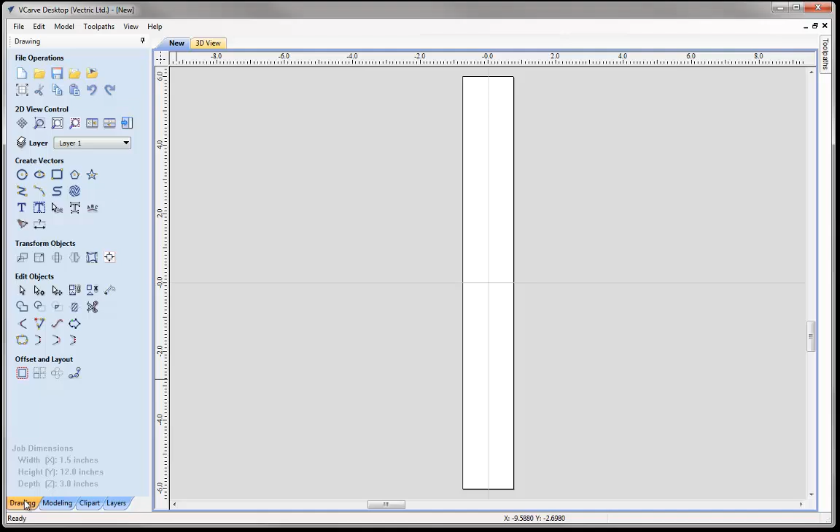I'm going to create a new file. Okay, so again, 1.5 by 12 by 3 inches. Again, I'm just going to make sure that's in the centre for now, just for positioning my model. And then we could go ahead and press OK. So let's go into the modelling tab, and we're just going to go and import a model, and import St. Hugh, and press open. This time we want to do a side, so we're just going to pick either right or the left. We need to do both anyway, so we'll just go to right in this case.

And then again, we need to alter the model size. So here, this is always going to be the same. It's going to be 8. Let's press apply. And we'll just centre that just to put that in position so you can see how that looks. And then we're just going to unlock XY, and we're going to change the Z to 2.7. We're going to change X to be 1.4. Press apply, centre that to make sure it's in the centre. And we're going to push the 0 plane all the way down to the bottom. And we're going to go ahead and press OK.

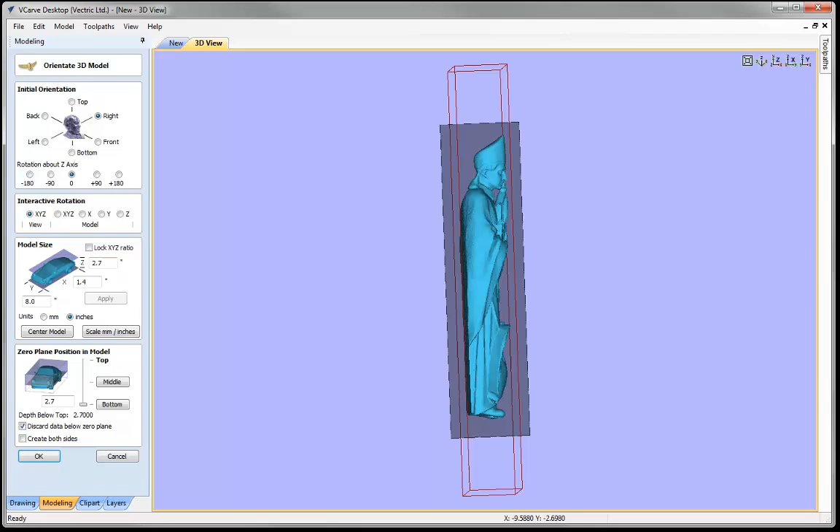Okay, so here we have this side view of St. Hugh. Okay, so he's now 2.7 inches high. So now we need to create the vectors for our toolpath. So let's just tile our windows. Let's go to View, and we're going to go Tile Windows vertically. With that component selected, let's just create a boundary. Okay, so you can see we've got that vector there. Let's go into the Drawing tab, and again we're going to go ahead and draw in the offset. So I'm going to offset that outwards by 1/4 inch.

And I'm also going to create my rectangle in this case. This is just going to be the area just for visual reference of where the ends of my material block are. So in here we're going to go with a height of 9 inches, and then we're going to go with a width of say 2 inches, and we're just going to go ahead and press create. Okay, so you can see that there, and then we could just close that down.

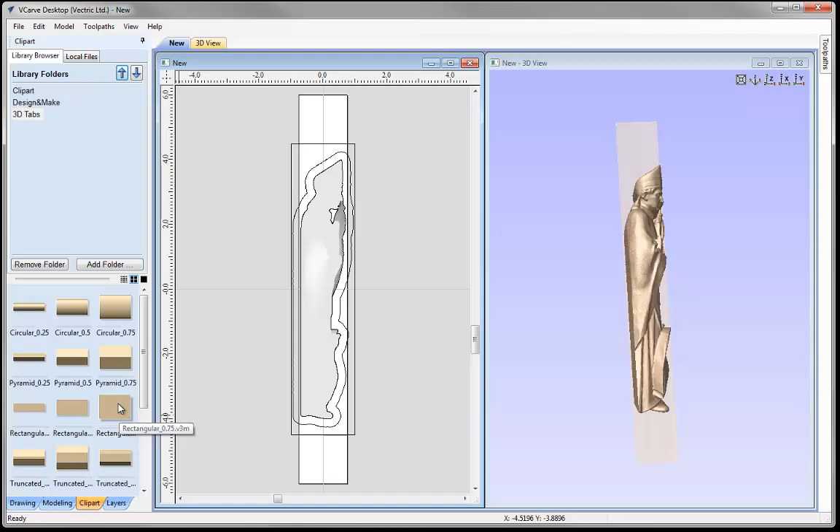Now I need to put some tabs in, so let's just go to my clip art tab. I'm just going to import the same size tabs, rectangular 0.75, double click just to put that in. Okay, let's double click that, there we go. Let's go into the Drawing tab with that component selected. Let's just rotate that about its centre point by 90 degrees and press apply. We can close that down. And then I'm just going to shift that up to the top, so keeping that in the centre there.

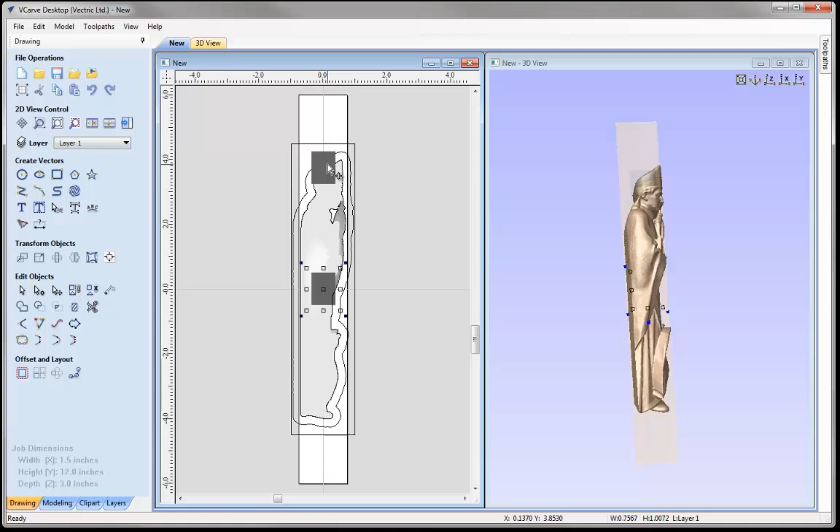So I'm going to shift that up to the top there, and then just bring that across. This is just to ensure that I'm getting the whole area of where the tab is in place there.

With that tab selected, let's go and apply some height to that. So let's go to the Modelling tab, go to Component Properties, and bring this all the way up to say 2.5. You can see that's way over there, so I'm going to make that 2 inches, and maybe bring it a little bit down, make that 1.5. Make that 1.8. This is just to ensure that I'm not going to cut into that tab.

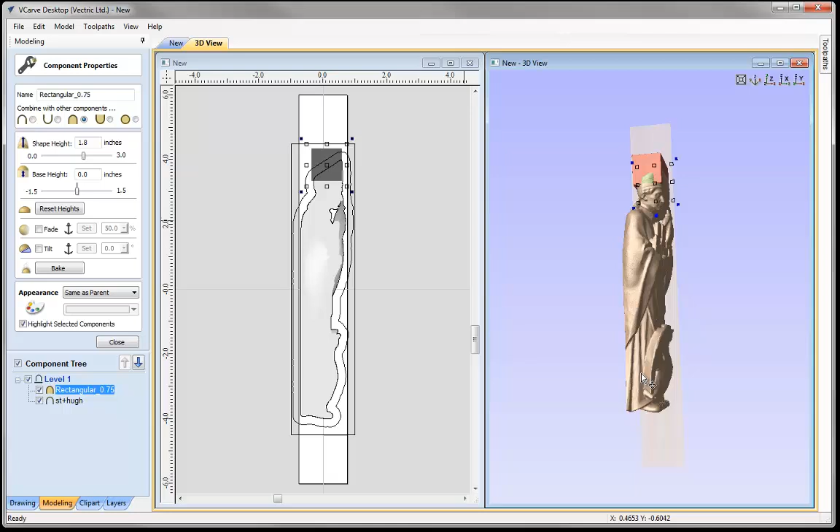Now we've already pretty much cut into the side of St. Hugh from when we did the top side, so it's not really too much to worry about what we're going to cut into on the top here, as we would have really cut the majority of this. All we're really thinking about is cutting into the areas that we couldn't get to on the top side, for instance behind this wing area here. So now we can cut into that. So that's that one.

Let's take that, and then create a copy on the bottom there. So if that component's selected, let's go to the drawing tab, and use the option to mirror selected objects. Let's use the option to create a mirrored copy, flip vertical. You can see it's created one at the bottom there. So then what we need to do is just position this.

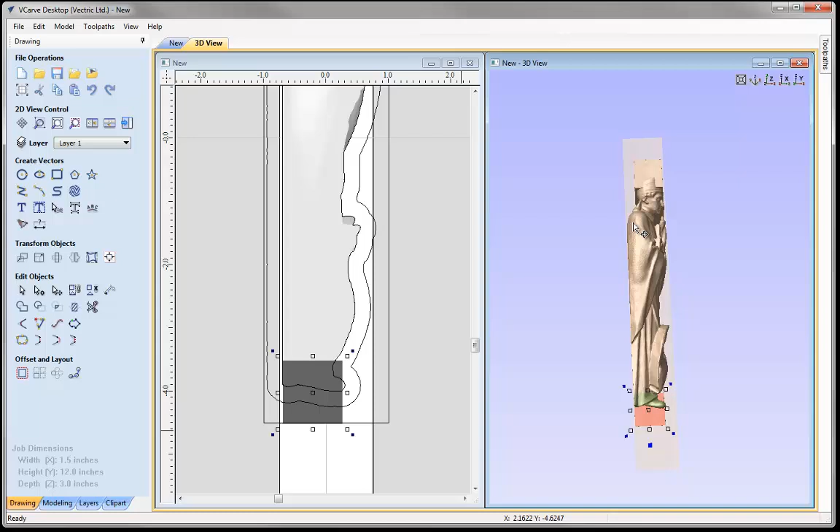Now we know that tab at the bottom is positioned flush with the back of St. Hugh. So we're just going to put that roughly in position there, and I'm happy with the height of that as well. Again, we're not really going to be cutting into a lot of the detail here because we've already cut into it.

Now, the next thing we need to think about before we go and create toolpaths is the depth of our part. Because we've turned it on its side, we've now increased the amount of depth we're working with. So we're now working with a part that's 2.7 inches deep. Now that's quite deep for regular tools to get down into, so we need to think about how we can overcome this issue.

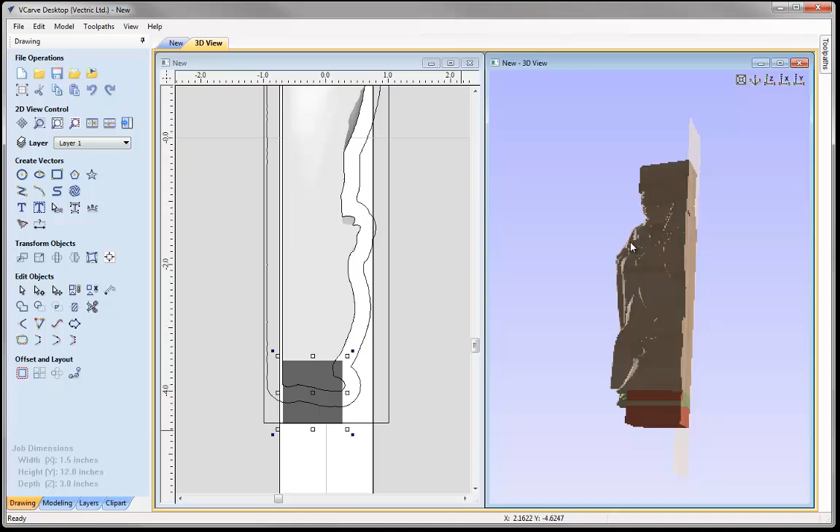Now what we're going to do here is actually add in a modelling plane, a zero plane. We're going to push that halfway, so we're only going to work with half of the model, and then cut that half, 1.5 of this side. When we come to do the other side, we'll do the same again, add that zero plane in at 1.5 inches, at the halfway point, and look at machining the other 1.5 on the other side. This is just a safety measure here.

So let's go to the modelling tab, this model option up here. We're going to use the add zero plane option, and then go into the modelling tab, go into the zero plane, right mouse click, go to the properties. First we want to set that to merge, and then make the base height 1.5, press space to enter that in. We can see that that's now 1.5 inches high, so we're only just cutting sort of half of the model here. I'm happy with that, so let's close that down.

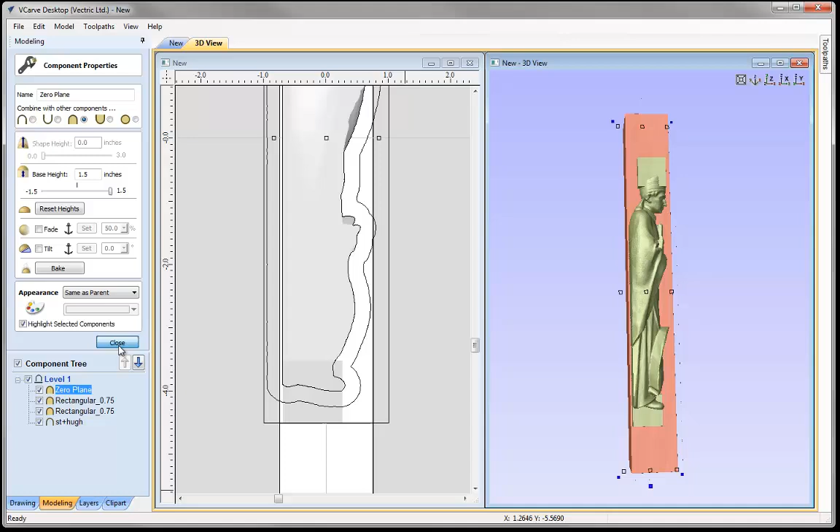So now we're ready to go and create some toolpaths. Let's go into the drawing tab, switch over to our toolpaths tab. I'm just going to press F in the 2D view just to fit that, and then we need to set up our material. So let's go to the material setup.

First thing we need to do is check all of the options in here. Material thickness we're working with is 3 inches. XY position, we want that in the lower left. The lower left is where we're referencing our jig from, and so once we've cut that jig out and then cut this part, it's all going to be referenced from the same XY position so that we keep that part aligned, and that's very, very important.

Gap above the model, let's just make that halfway. We can see my model thickness is at 2.6998. So let's go back over to the modelling tab. I'm going to go to St. Hugh, go to the properties, round that up to 2.7, press space to enter that in. And we'll just undraw the modelling tab there. And then update that, make that 0.15 above and below. Not that it really makes a difference because we don't actually have anything there. And then we could go ahead and press OK.

The whole reason we are doing that is just to keep everything within the center of our block of material, and that will help us keep everything aligned. So let's go ahead and press OK there.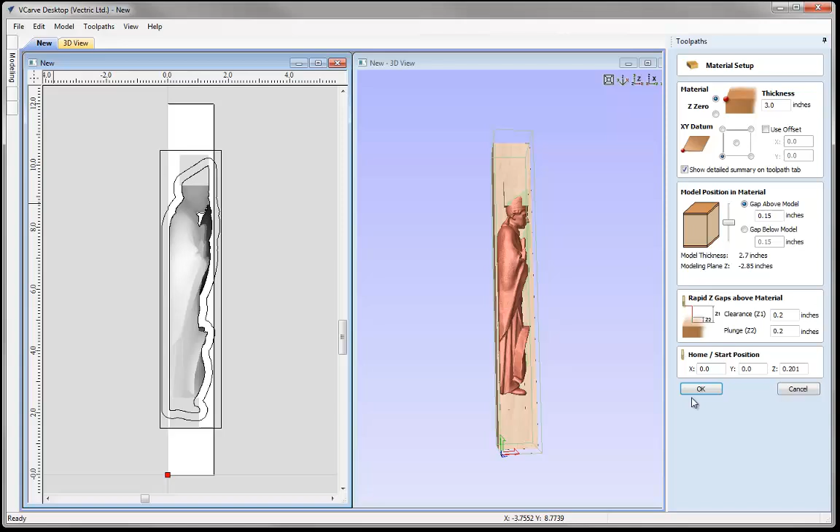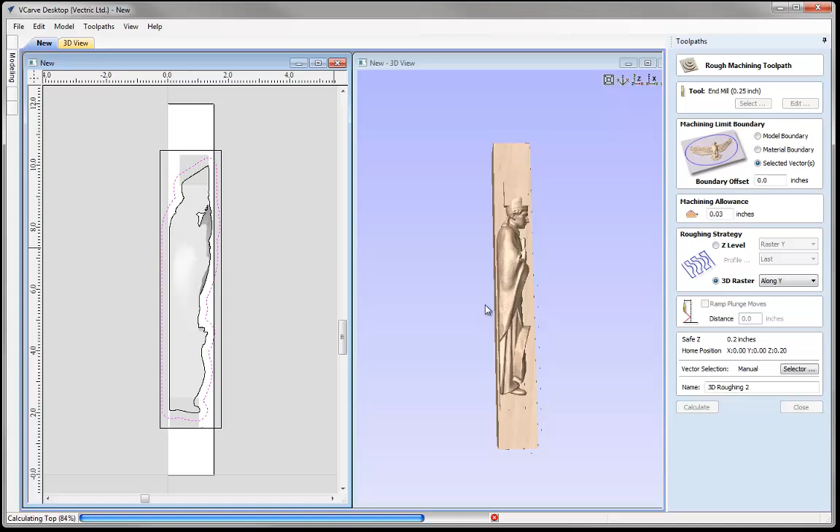I'm going to take that outer vector. This time I'm only going to run one roughing toolpath, a 3D raster along Y, and then press calculate. Now this would have already cut the majority of the material out when we did our top and bottom passes, so all we're doing here is getting into the detail we can't do, like behind that wing, which would be classed as an undercut when we cut that on the top side. So we're just getting into all the little details we can't reach when we run the top or bottom toolpaths.

You can see the software is creating a little simulation of how that will look. And again, you've got to remember that a majority of this material that's cutting away will not actually be there because we would have already cut that away. So when we run this, it will probably do a little bit of air cutting because it's cutting away at material that isn't there.

You can see it's just taking a while to create that. There's a lot of detail there for it to work out what needs to be cut.

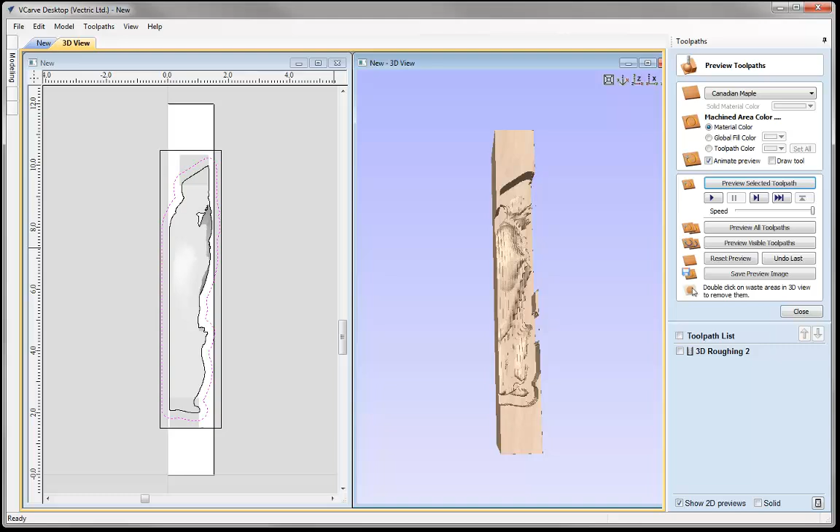And so you can see we've got the finished part there. Let's close that down, and then we're just going to run a 3D finish toolpath. So what we could actually do is just use this, the actual boundary vector, as we've already cut away everything outside there. So we're just going to use that one, go to the 3D finish. We're not going to offset that because we've already cut that away. We're just looking at going into the details in this case.

I'm going to do a raster. Let's make that 90 degrees so it travels up in the Y axis. Press calculate - the software's just going to take a minute to work that out for us. And we can see that there, so let's just preview that, see how that looks.

And that's the finished side. So we're going to get some nice detail in areas such as behind the wing here, and in some details on the side, like the creases of the sleeve here. So that's the side done.

So now we can move on and think about the other side. This is where we take our block of material and we're going to flip that over into our jig, and we're going to cut the other side.

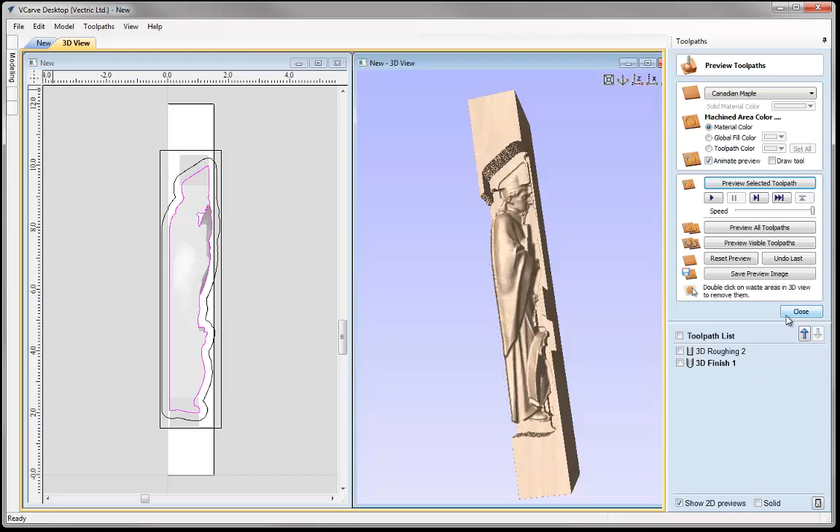So let's just go ahead and save this out. We'll close that down. We're going to go to File, Save As. We're going to call this one St. Hugh, and we'll call this one Left, and then press Save. Okay, so that's his.

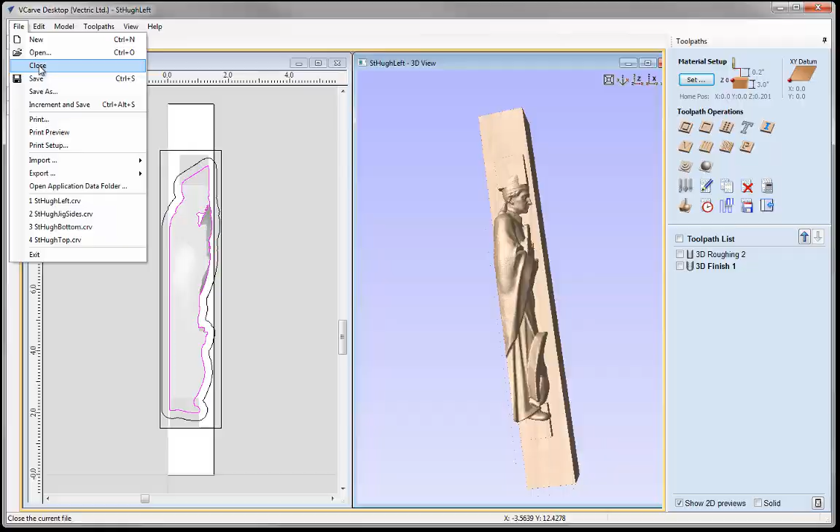If we're looking at it, that's his - that's the left-hand side. And so let's just go to File, Close, and then we're going to create a new file. We're just going to look at creating the other side this time. Exactly the same setup. I'm going to go ahead and press OK. Go to the Modeling tab. Let's import St. Hugh for the final time. Press Open.

This time, if we're looking at it, we're looking at the right-hand side here, so I'm going to use the left option. Okay, so we've got that side in view. Let's just alter these - we're going to make that 8. Uncheck lock XYZ, make that 2.7, we're going to make the X 1.4, press apply, center the model, pull that 0 plane all the way down to the bottom there, press OK, there we have it.

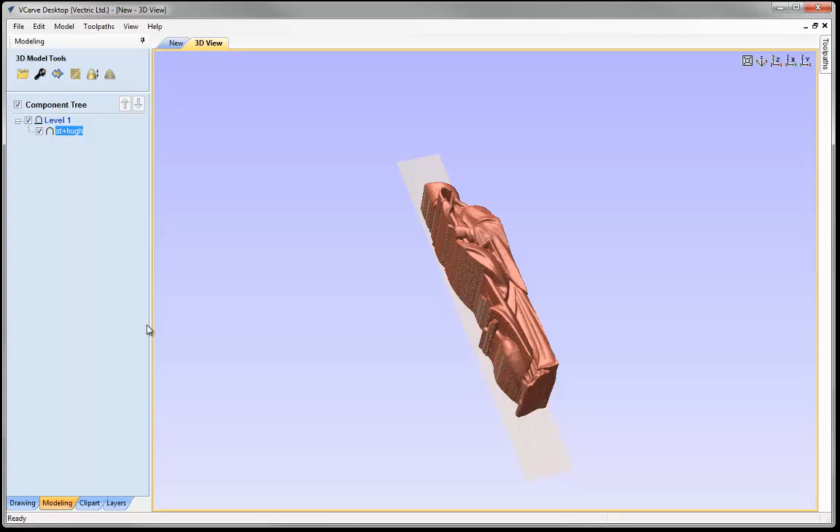And so the next thing we need to do is create vector boundaries and bring those tabs in. I could do that just by going into the file we were just in, so the other side here, and just for now I'm just going to make the XY in the center there just so we get everything aligned. Okay, I'm just going to ignore this message.

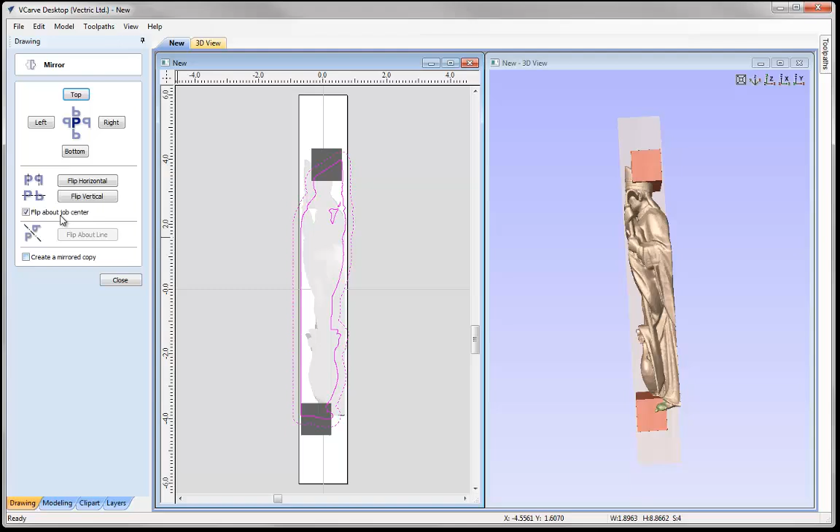I'm not going to save this file out, I just want to take the vectors and the tabs from this file. So I'll right mouse click, say copy, and go into our session here. Let's go into the drawing tab, tile our windows, right mouse click, paste, and use the mirror option. I'll flip that horizontally, and now everything's perfectly aligned, so I'm happy with that. We can close that down.

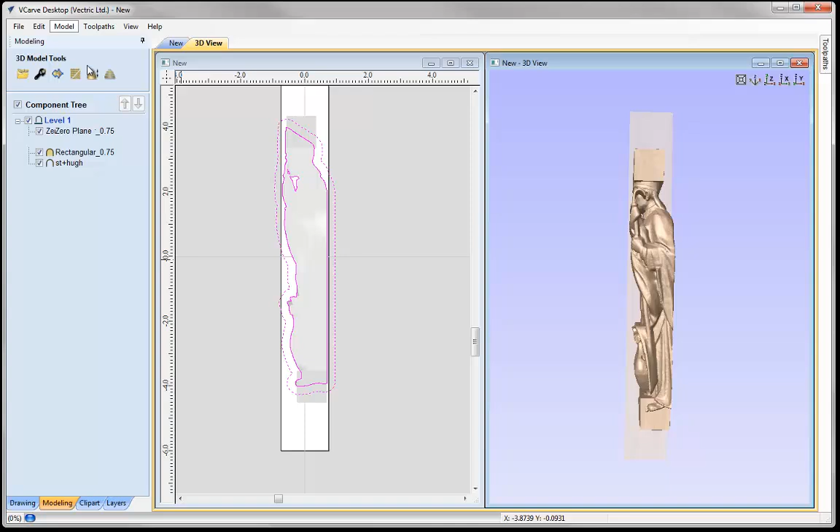I'm just going to leave the tabs as they are, and then we need to add in that zero plane. Let's go to the Modeling tab, go to Model, add zero plane, properties of that zero plane, set that to merge so it blends into St. Hugh, and make that 0.75, space to enter that in. We can close that down.

Just go into St. Hugh there, double check the height, put that to 2.7 and close that down, and we're now ready to create some toolpaths.

Let's go to the Toolpaths tab, so again let's set up our material. Important thing to do here: material thickness 3 inch, XY, we want that in the lower left. We are referencing from where we cut out our pocket shape to ensure correct alignment. Model position in material, we'll have a gap above of 0.15, just to make sure our model is dead on in the centre of our block of material, matching the other side. Then we can press OK.

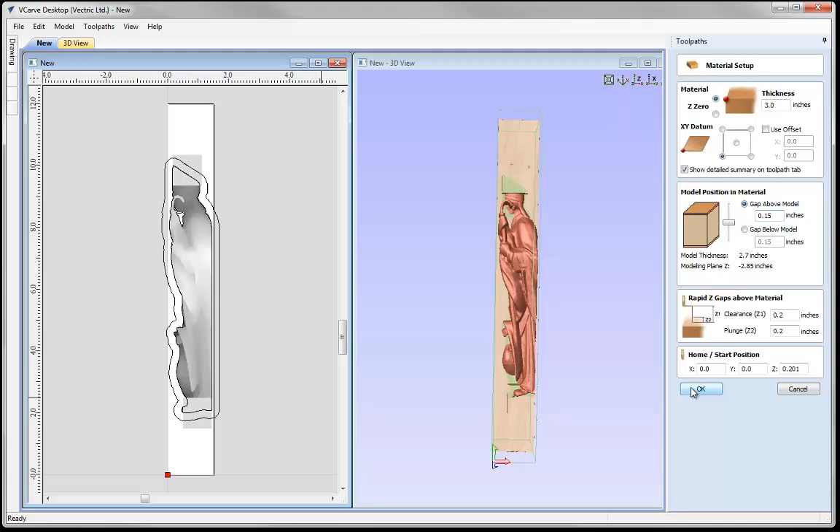So again, let's take that vector, we're going to run a 3D roughing toolpath, 3D raster that, press calculate, and that's going to work that out for us.

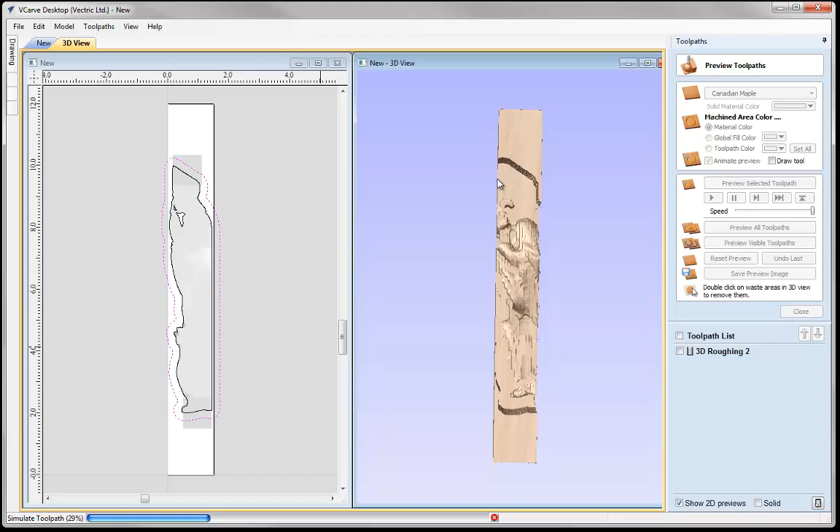We could go ahead and preview that if we wanted to, just to see how that looks. Again, none of this material, or the majority of it, won't be here because we would have already cut that away when we cut the top side and the bottom side. This is one of the downfalls of only being able to see one view in the software. We're just going to use our imagination and think about how a lot of this material won't be there, but when we run this toolpath, it will be doing a lot of air cutting, as I mentioned earlier.

You can see that we're going to get into details such as this area between his hand and his chest, and doing that in ordinary two-sided machining, we would not be able to get that because this area would not be cut into from the side.

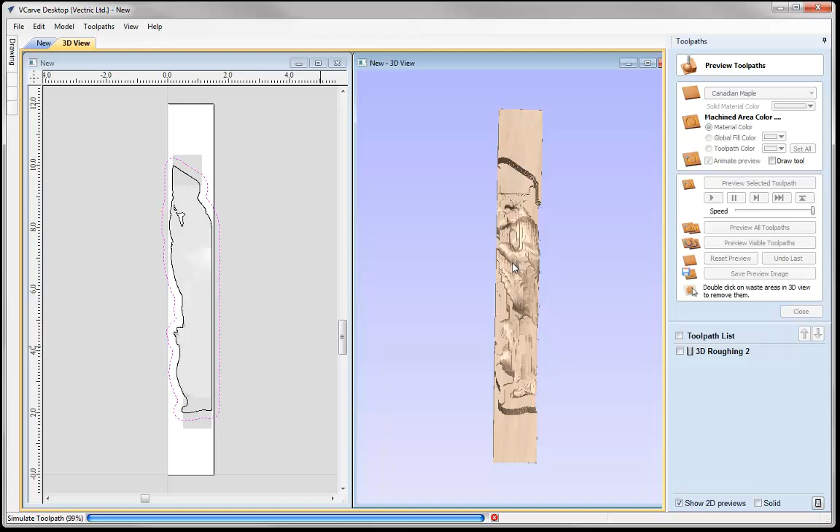Okay, that's just nearly done there, so I'm happy with that. Let's close that down, and then take the vector here. I'm going to run that 3D finish toolpath, rastering it in the Y angle, so we'll make that 90 degrees. We'll press calculate, and that's going to work that out for us.

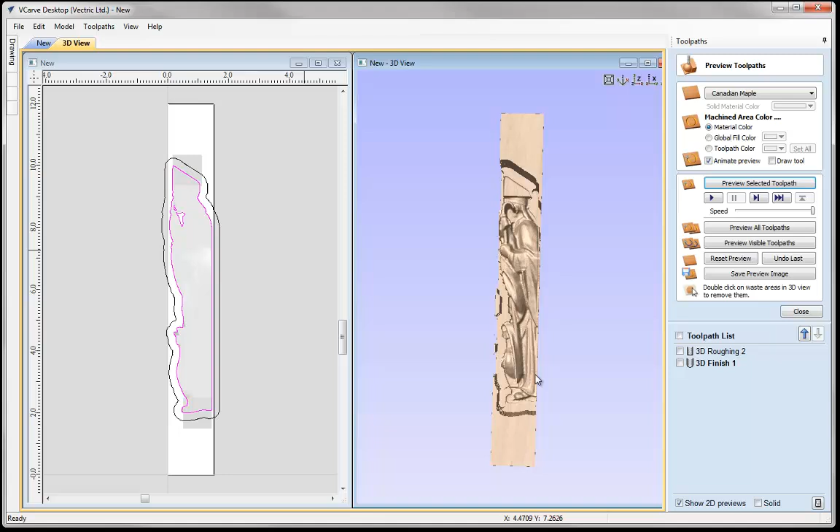Then we can preview that to see how that looks, and we can see we're getting all of that detail in there. I'm happy with what we've got there, so let's close that down. That would be the last side, and we should now have a full 3D model with 4 sides machined.

So let's go and save out this file. We'll go to File, Save As, and call this one St. Hugh, but we'll call this one Right. Then press Save, and you can access all of those files from the project folder.

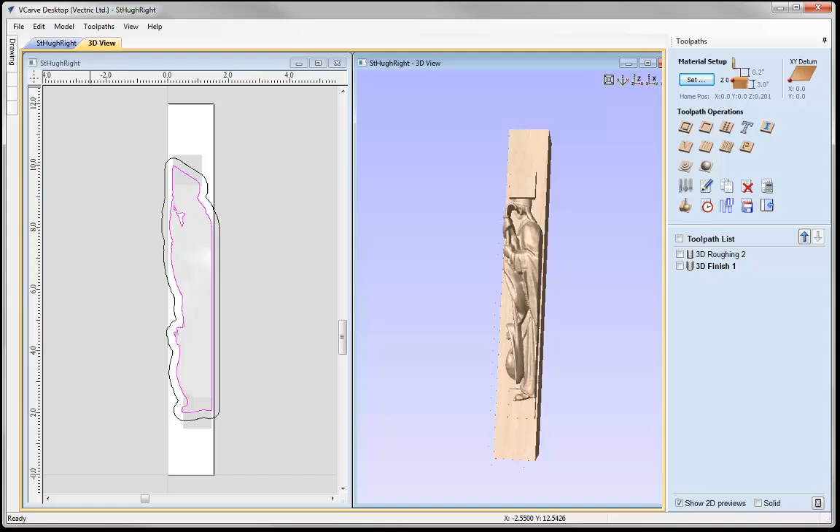That completes this tutorial where we've looked at how we can create a 4-sided part by importing third-party 3D data. We started off by making sure we had a jig set up to the exact size of our material block for the top and bottom sides, which we then ran a Pocket Toolpath on. Once done, we started importing St. Hugh into our job, looking at the top side first, making sure all dimensions were set exactly the same for the top, bottom, left and right. Then ultimately we ran all of the toolpaths to cut the part out, and you can access all of those files within that project folder.